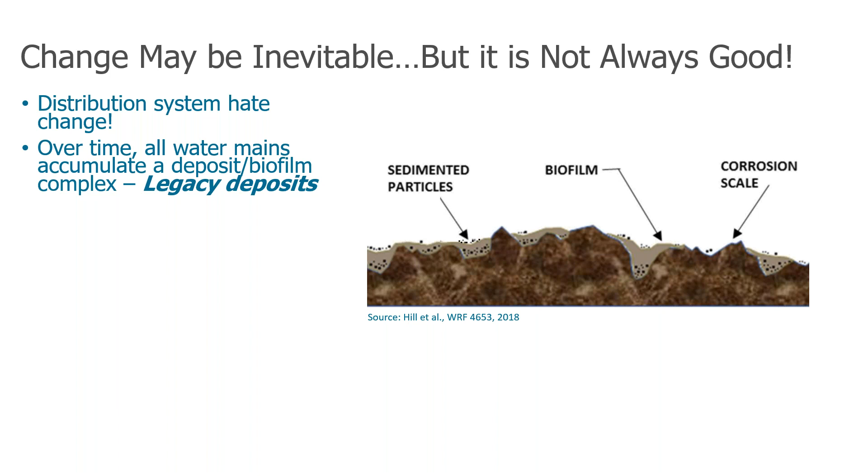So beginning with background and reasons for concern. We all know change is inevitable, but it is not always good. Distribution systems hate change, because over time, all water mains accumulate a deposit biofilm complex that we call legacy deposits. This is really a complex of corrosion scale, biofilm, and sedimented particles that all occur together in what we call a dynamic equilibrium with the water.

They can subtly adjust to minor changes in daily flows and maybe subtle changes in chemistry, but when we have larger scale changes, we can get destabilization and then release of these deposits. Now, these releases may or may not result in public health concerns, but they almost always can result in customer complaints.

So what we have to remember is that we have a lot of old pipes out there, and then when we do a change, we're going to have a reequilibration process. It's during this reequilibration process that we can really start getting into some trouble.

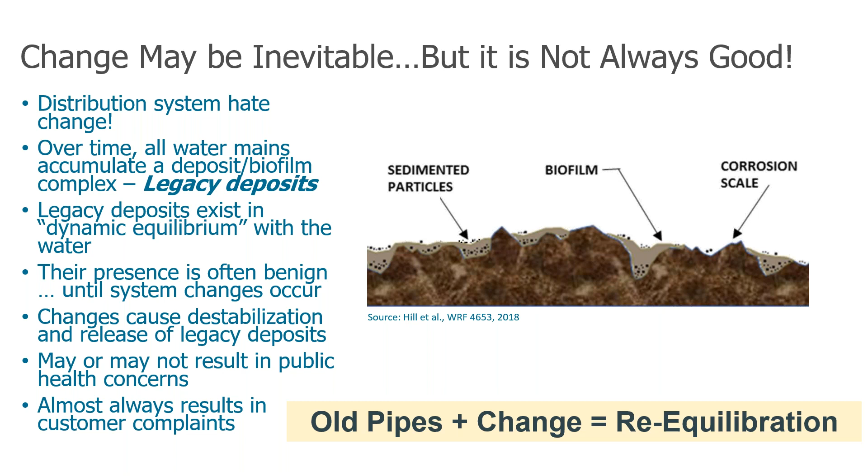Compared to non-scale forming pipes, where the material that is present has either been settled or co-precipitated or adsorbed, it's not from the pipe material itself. And those are often our cement-lined, plastic, and asbestos cement pipes.

The iron and manganese and biofilm that accumulate on these pipes serve as major accumulation substrates in and of themselves for other regulated metals. We commonly find these metals at varying concentrations in these pipe scales. And it's not just the big corrosion tubercles we worry about. Yes, there's a lot of iron and there's a lot of massive material, but these very thin films can be great accumulators for biofilm and these other regulated metals.

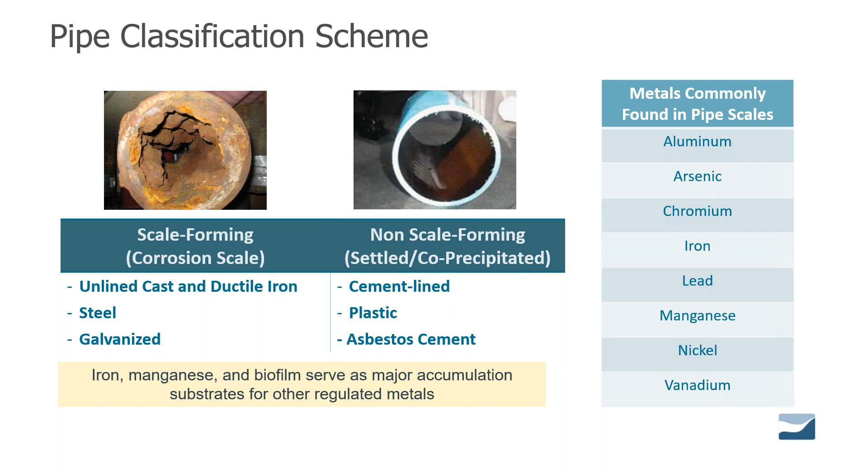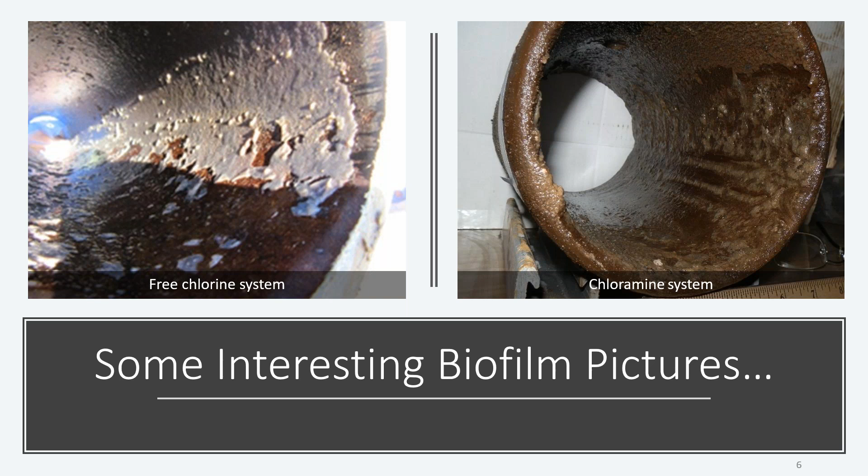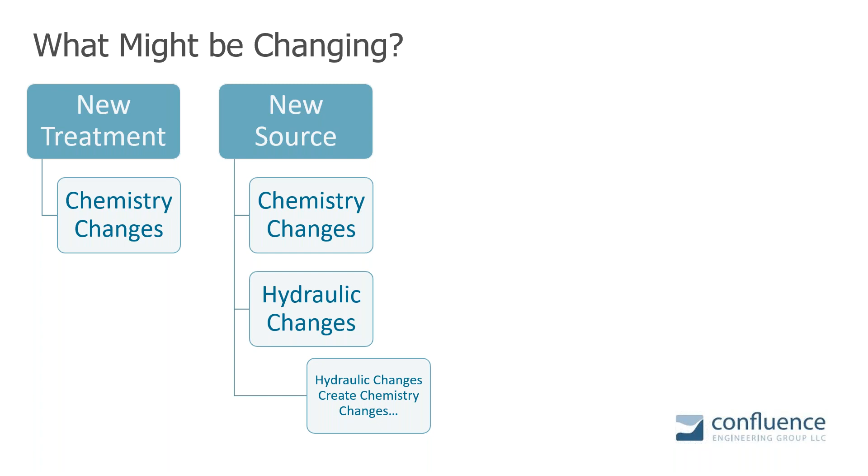So what might be changing with a source or treatment change? Well, with new treatment, assuming it's at the same plant and the hydraulics aren't changing, we're really looking at some chemistry changes. But with a new source integration, we have potential chemistry changes due to differences in the compatibility of the supplies, but also significant hydraulic changes that can have hydraulic scouring effects causing releases, but can also create chemistry changes because we're changing the flow dynamics in the distribution system.

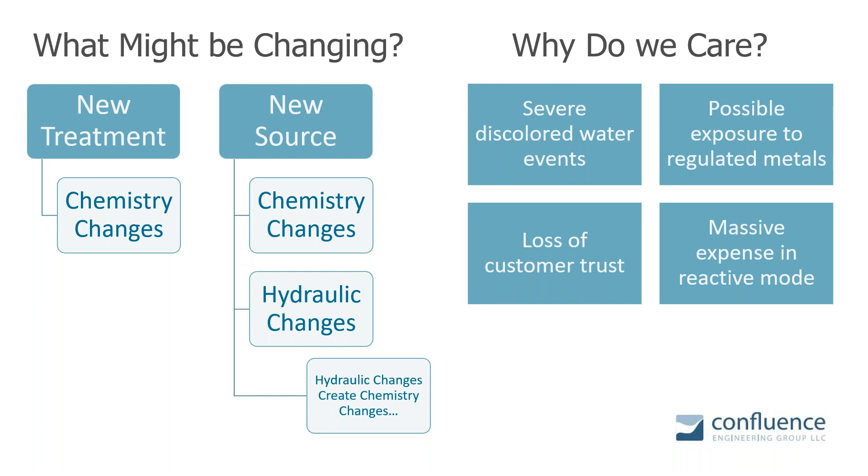And of course this is quite important because this can result in severe discolored water events, possible exposure to regulated metals, loss of customer trust, and then massive expense when we are in reactive mode trying to solve one of these destabilization problems.

And then with these hydraulic releases, these particle resuspensions often have color to them and are releasing associated iron and manganese biofilm. But when we have a chemical release event, the time scale can be much different. It can take days, weeks, months, or even years for scales to re-equilibrate. And the release may not always be in a visible form.

When we talk about even just measuring lead and copper at the tap, those are release events that you really can't see. So it's important to note that these can be happening, and we're not always having discolored water along with it.

So the time and spatial components can vary significantly for a hydraulic versus a chemical release. And therefore our monitoring approach to try to understand if these are occurring, and the need to control them, have to be suited to the type of release event that could be occurring.

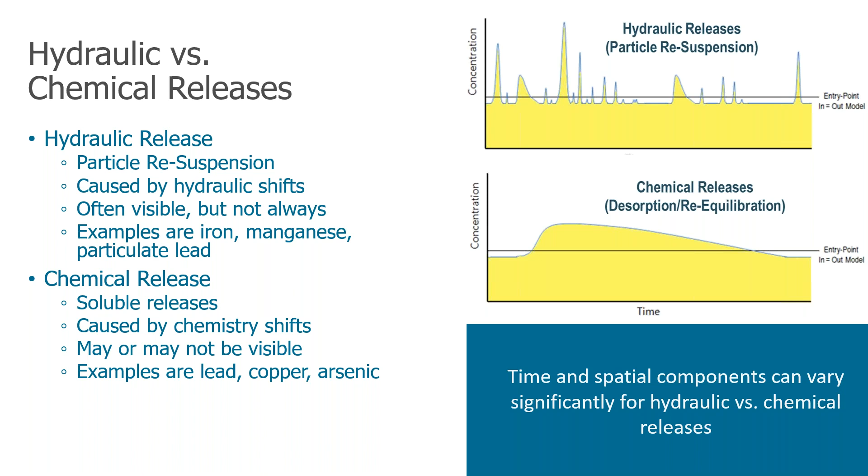Now we have a special combo release that we lovingly call the doom loop of distribution systems, when we get simultaneous chemical and hydraulic release. This is what we see when we're in reactive mode to these problems. We start with an unstable chemistry condition or a change in the chemistry.

We apply that to our tens or hundreds or thousands of miles of distribution system pipe and premise plumbing. That creates more unstable chemistry as all those pipe reactants react with the water chemistry. And then we run out, we start opening hydrants, we start moving water, flushing, breaking off tubercles, and we damage the scales while we're trying to clean up.

That exposes new fresh surfaces to have further reactions with the chemistry, and you can truly get into a doom loop. It's this exact process that we are trying to avoid.

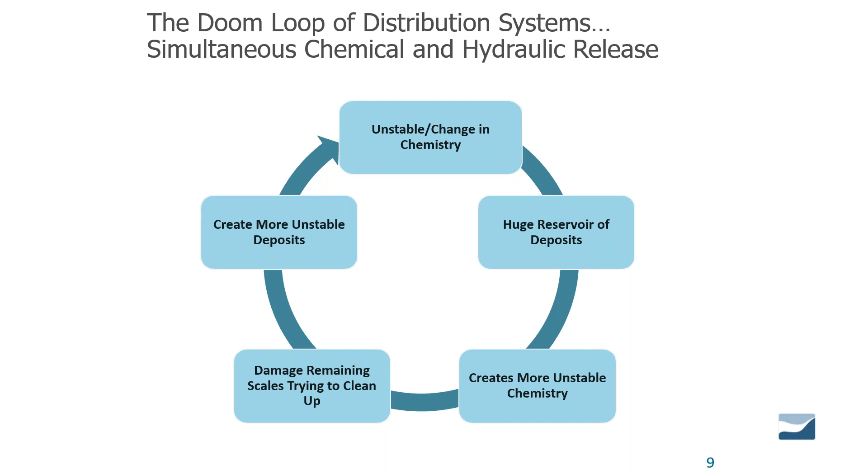So I want to talk about some corrosion control strategy changes that can impact water quality, starting with pH alkalinity adjustment. One key takeaway here is that you can't just match the pH of two different sources and call it good. The way the metals react to pH, DIC, oxidation reduction potential, and other parameters - they're actually forming different metal species in the water.

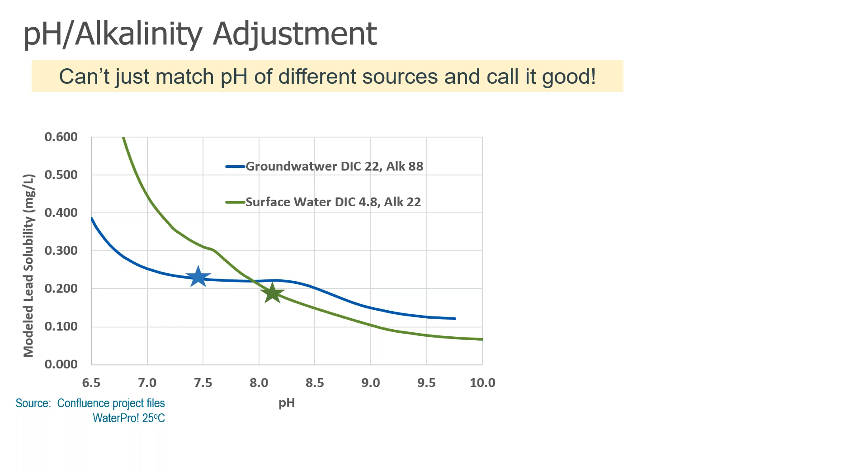So what I've provided here is an example: the green curve is a surface water, a low alkalinity, low DIC surface water, and this is its lead solubility curve. Lead solubility is a function of pH, versus a groundwater with a higher DIC. You can see the shapes of the curves are quite different - they behave differently at nearly all pH levels. And that's because of the different DIC, we're actually forming different lead species in the water.

The groundwater is forming a lead mineral, in this case dominated by one called cerussite, and the surface water is forming a different mineral called hydrocerussite, and these have different solubility characteristics. So even if we were to bring in a groundwater and a surface water and match the exact lead solubility level at the exact same pH, we'd still have two different lead species. And every time we alternated between those two sources, the scales have to re-equilibrate.

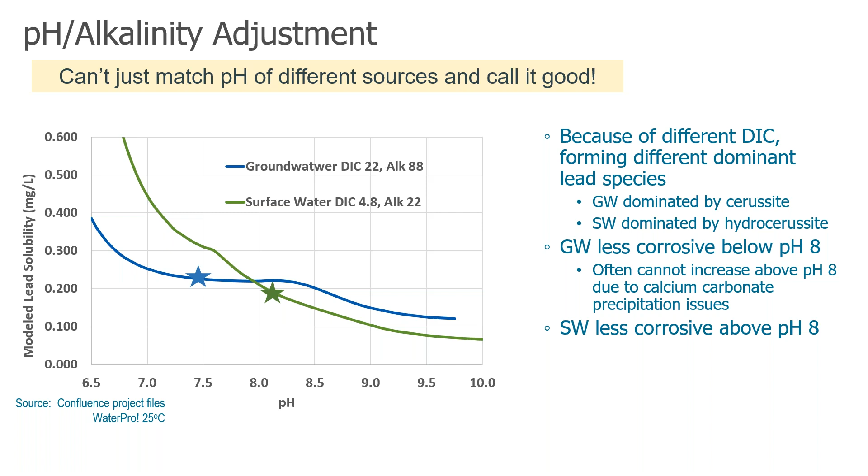City of Tacoma Water, with HDR Engineering and us in support, harvested materials from their distribution system - brass meters, you can see here, pipe, and lead solder, actually lead goosenecks - and operated the test rigs so that they were first all exposed to surface water at pH 8.1, and then a series of materials was harvested for visual analysis and scale analysis by University of Washington.

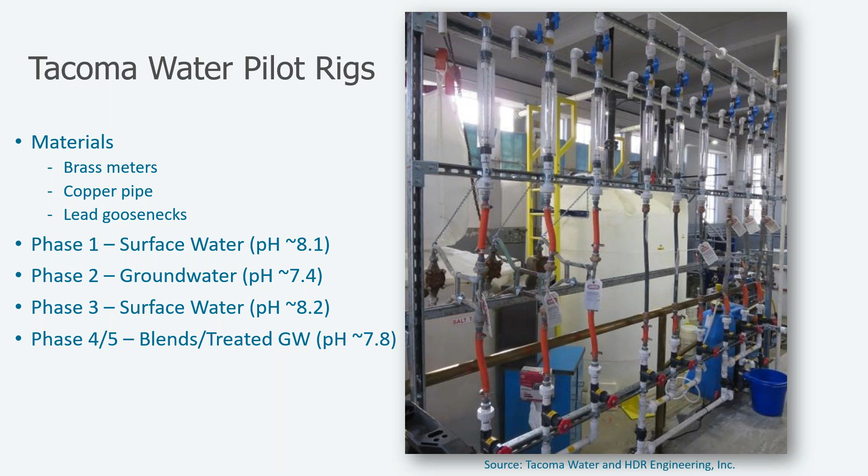And then the whole rig was converted over to groundwater at pH around 7.4, and another set of materials were harvested and analyzed to see the degree to which these changes were occurring. Of course, simultaneously, we were doing sampling off of the rigs to see what the lead levels were.

These graphs show in blue total lead, red is soluble or dissolved lead, so the difference between them is particulate lead. In phase one, when we're all surface water, we're hovering around 10 micrograms per liter of lead. Then when we switched to the groundwater, we see a particulate release, much more particulate activity, and higher overall lead levels.

Switch back to the surface water, a particulate release, and more particulate lead, because again, these scales are reequilibrating. And if we look at the overall solubility levels, lower in surface water, higher in groundwater, that is what the models predicted for the pH and DIC conditions of these waters.

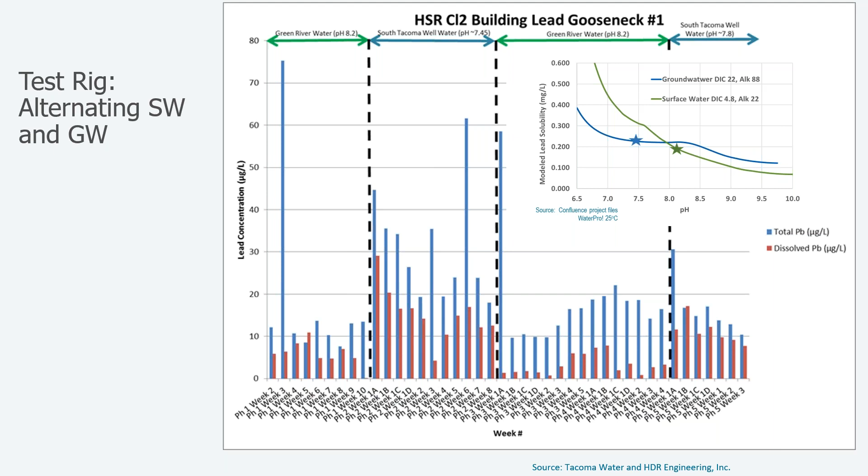So in this case, this was very well-behaved water. It did what the models predicted in terms of lead release levels, but it's this changeover that we kept seeing, the increase in particulate levels.

So you can't just match pH of a groundwater and surface water and assume that you are going to be forming the same lead species. So the goal here is to avoid alternating these sources or have a controlled blend as often as possible.

Some lessons learned with orthophosphate: once you start feeding orthophosphate, especially for lead control, you must always try to maintain an adequate residual level. Orthophosphate is forming very different lead compounds. It is not forming the carbonates, it's not forming the hydrocerussite and the cerussite. It's forming lead phosphates on the scales.

The effectiveness and the dosage required are a function of the pH of the water and the DIC of the water. Characteristics that can impact your ability to maintain your target residual include calcium, iron, aluminum, and other factors. Should you stop feeding suddenly or introduce a new supply with very different characteristics, you can imagine that you are impacting the performance of your orthophosphate.

And this is really one of the major issues that happened in Flint. It was discontinuation of the orthophosphate and the whole need to try to convert to the carbonate species, which wasn't successfully done, was a major contributor to the lead release issue. So we've been learning a lot about the importance of feeding orthophosphate and maintaining orthophosphate residuals in the distribution system.

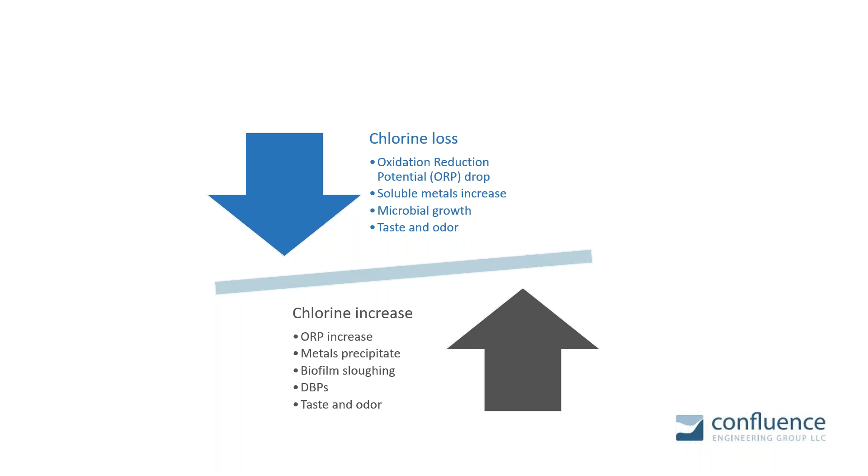Talk a little more about that. But with regard to maintaining residuals and trying to prevent metals release, this is especially important on unlined cast iron scales.

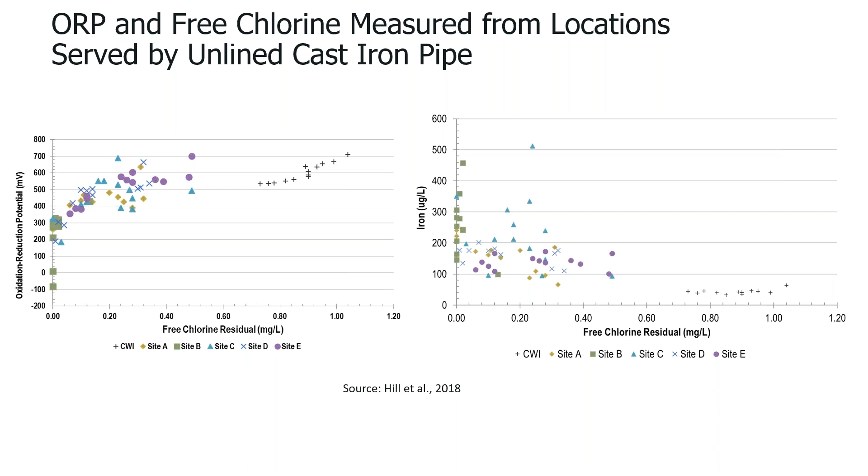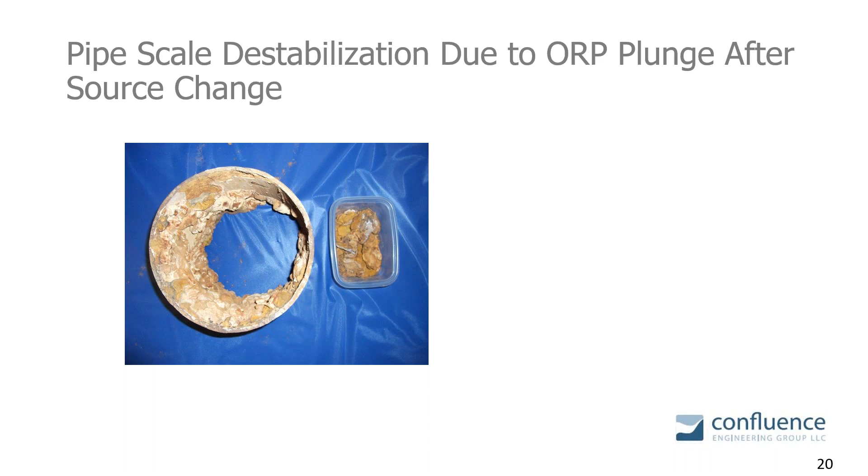After they introduced a new source of supply from the alternate side of the distribution system, this area became stagnant. The water mounded up in this area, became stagnant, and they lost their chlorine residual, and it literally dissolved the iron scale off the pipe.

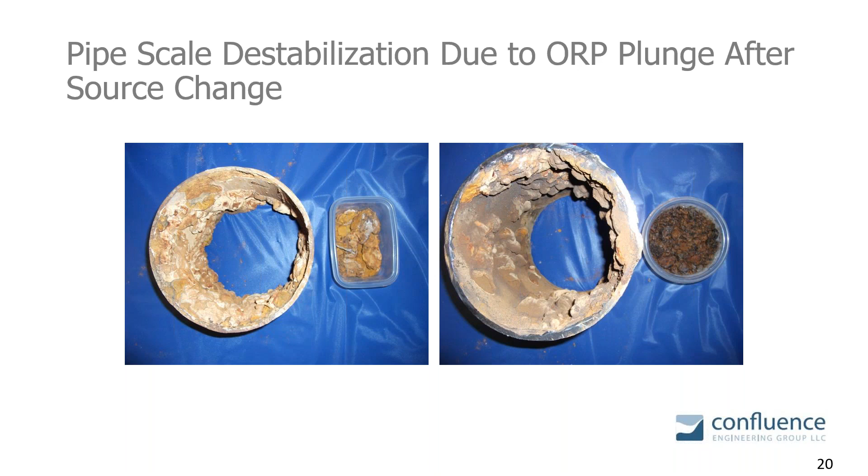It was determined this was all due to hydraulic mounding and complete loss of residual, with negative oxidation reduction potential. This was reversible once they got auto flushers, which kept the water moving and gently flushed the pipes without breaking up the tubercles even more. Eventually they did have to do some main replacement, as these were old, corroded mains needing service.

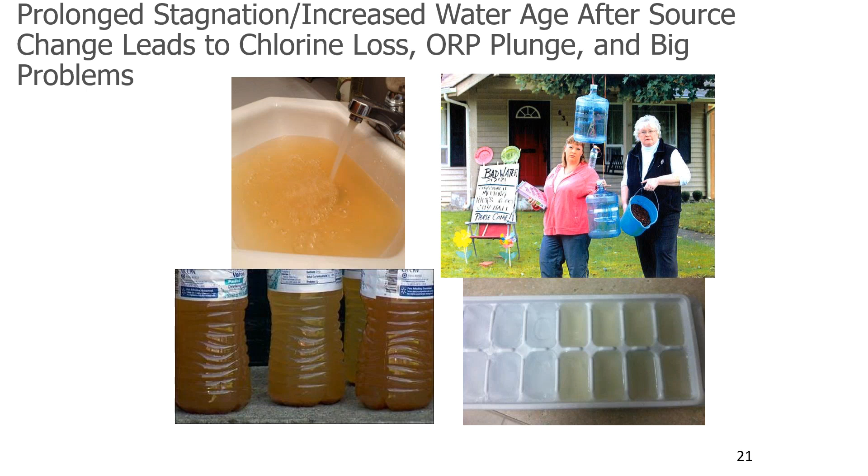An example of the other direction: increasing chlorine. We're going from unchlorinated wells to chlorinated wells, or areas that historically have consistently had low chlorine, and all of a sudden you make a change, adding booster disinfection to solve that, and you rapidly increase the chlorine. The types of problems we see are precipitation of particles such as iron and manganese, causing co-release of those regulated metals, and change in the biofilm.

There's also a quirk where copper behaves differently than lead. When you're in low chlorine, it forms less soluble copper species, and as you add chlorine, you create more soluble copper species. So during that reequilibration phase, you may see an increase in copper release.

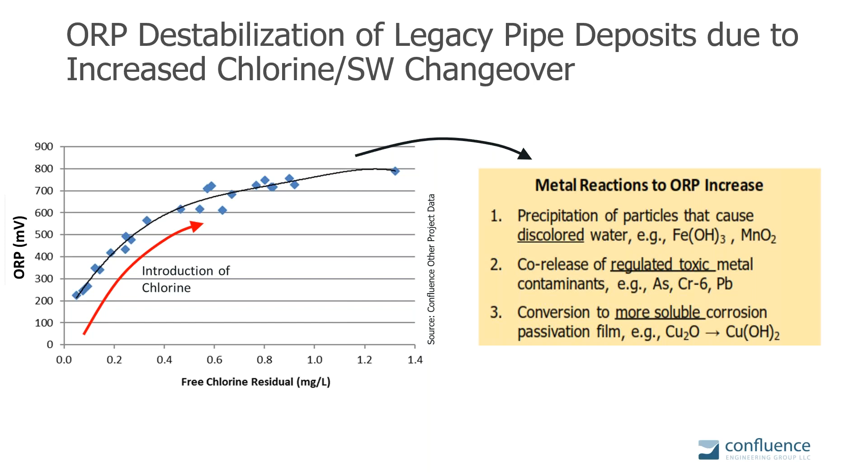An example of where we saw a problem with manganese: here's a system with fairly new pipe, only about 5 years old, but it had been receiving groundwater with non-detect levels of iron and manganese, but clearly enough in this case to be microbially adhered and adsorbed to the pipe in a very slippery slime surface.

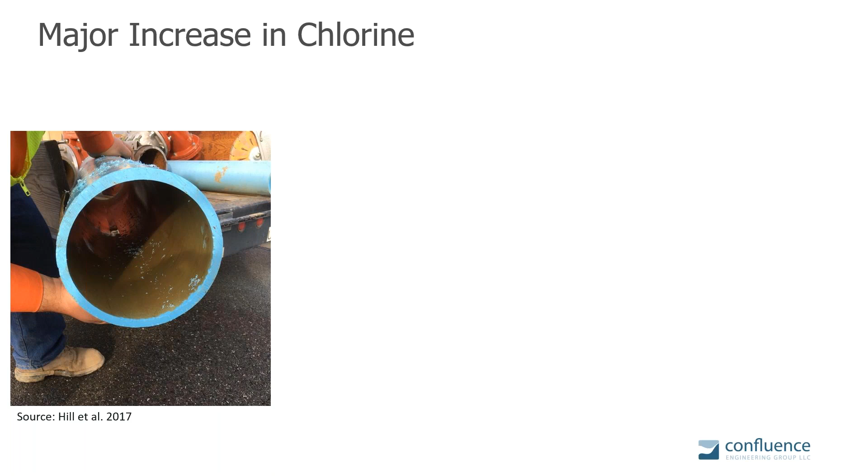Then when surface water was introduced with high chlorine, the chlorine went from less than 0.2, typical in this area, up to 0.8 all of a sudden, destabilizing this material. Flushing, even coming back after 2 weeks, after 5 months, this tea-colored material from ongoing destabilization of the pipe materials from the chlorine was occurring, and flushing was just not enough to get it out.

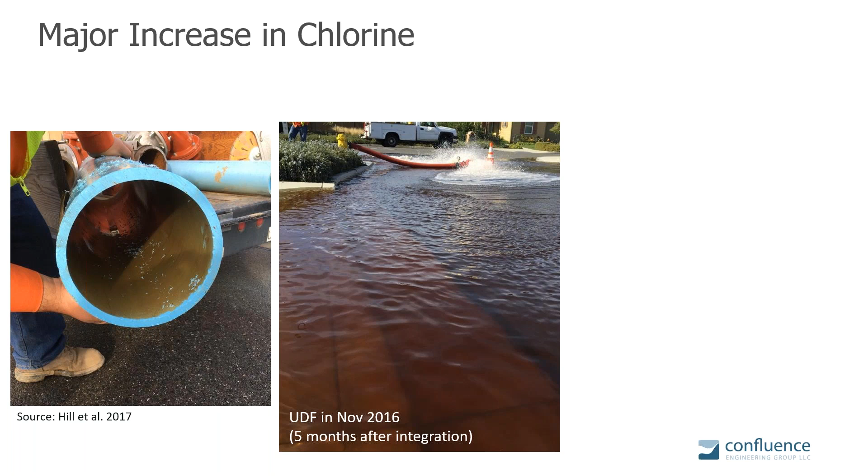Eventually I had to do swabbing 10 months later, and this is still the amount of material coming off of pipes that looked like this, with very thin films. So in this case, there was a widespread recurring discoloration episode lasting about 12 months. This is a chemical destabilization, attributed to destabilization of the legacy manganese and biofilm adhered to this pipe due to the introduction of a major increase in chlorine.

So with filtration changes, I just want to talk about a couple of things. Don't have a whole lot of time to cover these in detail, but we have to be aware that when we're changing coagulants in our filter plants, we can make changes in the chloride-sulfate mass ratio, which can impact galvanic corrosion.

And if we're increasing chloride levels, we also have to understand that that's not good for iron scales either. It can impact the solubility of iron, and then also aluminum breakthrough and accumulation.

I want to mention that if we don't have good control of our alum, it can accumulate in the distribution system. It can exert a phosphate demand. It can create milky aluminum phosphate water out in the distribution system. It affects pipe friction, all kinds of things. It can accumulate lead. So we definitely want to think about our control of aluminum before, during, and after any treatment changes.

Key objective of filtration is removal of natural organic matter. Just want to point out that impacts of NOM on metals are not straightforward, but overall it's good to remove. There's some research suggesting that NOM could be slightly protective for iron, and there have been mixed results for copper.

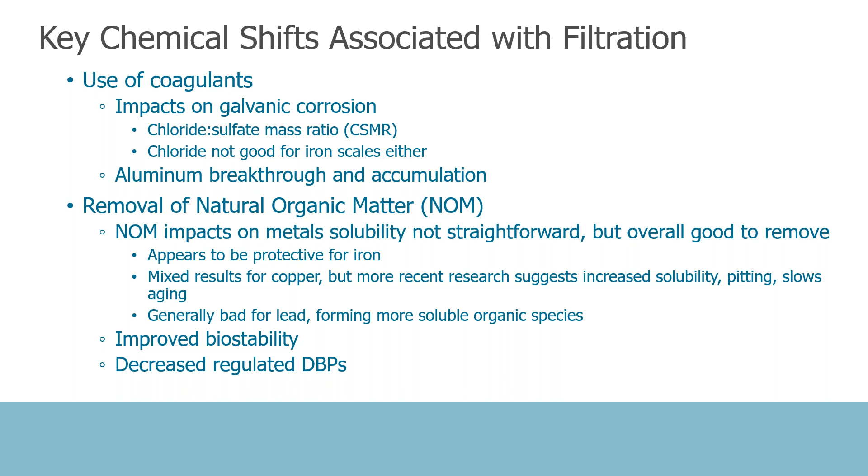But more recent research suggests that NOM itself increased solubility, pitting, and can slow the copper aging process, so it's good to remove it. NOM is generally bad for lead because it forms more soluble organic species, so again, good to remove it for metals. And we know, of course, we're removing the NOM for improved biostability and decreased disinfection byproducts.

So now to talk about some preparation steps and tools utilities can use to prepare for and avoid these types of issues. I've listed 6 key strategies, steps, and tools here. First, of course, we must do a detailed assessment of the finished water and compatibility of different sources. Understand the hydraulic changes that might be occurring if you're bringing on a new source or adding a chemical, such as booster disinfection from a new location. How is that going to affect areas of the distribution system?

Understanding what is out there on those piped materials and deposits. Reviewing your O&M strategies and capabilities. Do you have a flushing program? How do you control water age? Do you turn over reservoirs? What are your capabilities, and how much would it take to enhance those capabilities?

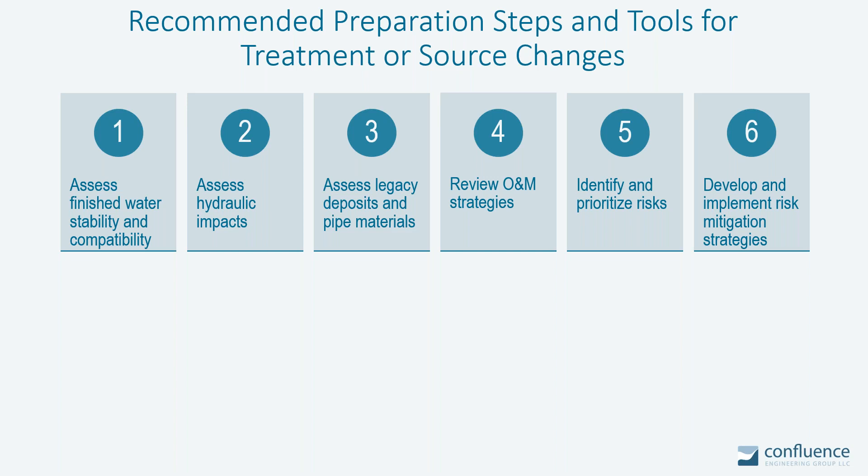And then you can identify and prioritize the risks and develop and implement a risk mitigation strategy well in advance of making these changes. I've listed a whole series of tools under every one of these that can be used, and of course there are varying levels of expense and complexity. But at a minimum, every system should do the monitoring and desktop evaluation, should do some flushing to see what comes out of the pipes to try to understand what's there, and should start developing flushing tools and programs and get going on monitoring and communication. So there are key elements that must occur no matter the system size.

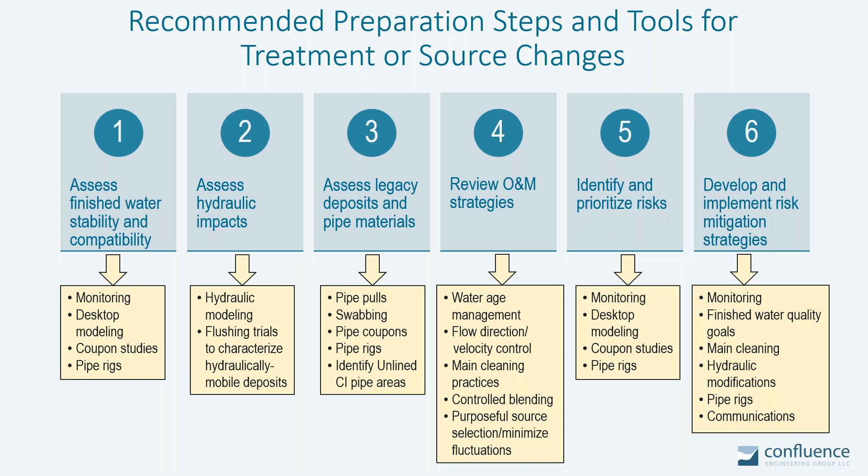With regard to main cleaning and flushing as a tool, we've been learning a lot - what comes out during flushing is really only a fraction of the story. It's what we call the hydraulically mobile fraction. And of course that makes sense: you're applying a shear, and there's a certain amount of material that's going to respond to that shear and be hydraulically mobile. Here's some photos of what came out during a flushing profile on a flush of C900 pipe at 6 feet per second.

And then on that exact same stretch of pipe, we did some swabbing, passing foam swabs where you have to have a launching station and retrieval stations. You've got a hydrant and you can launch the swabs through, and they act like a squeegee, literally. You can see the amount of material that still came out just after the first swab pass, after unidirectional flushing at 6 feet per second.

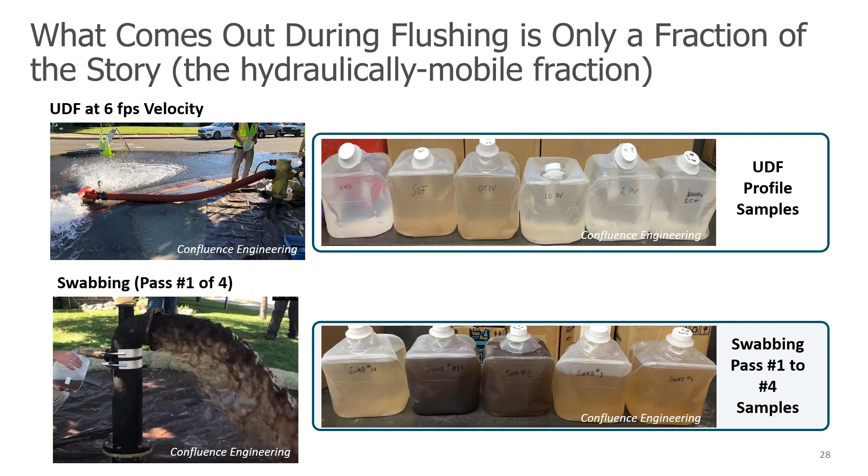Swabbing - the first pass of the swab provides substantial additional benefit to remove this material. I want to emphasize we don't necessarily recommend swabbing on a scale-forming pipe, remember that's with all the corrosion tubercles. This is on non-scale-forming pipe where you can safely squeegee the pipes without damaging the pipe or the corrosion scales.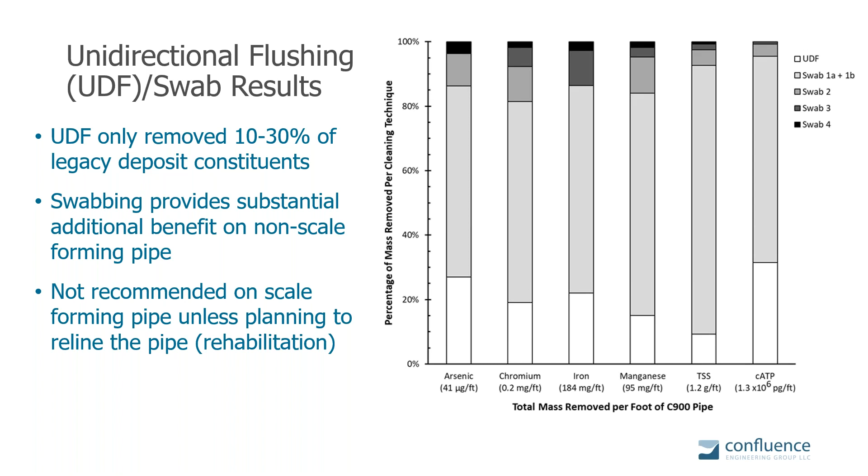If you're going to do swabbing or pigging on unlined cast iron pipe on a scale-forming pipe, you probably need to have a relining plan, a rehabilitation plan. So it's key to know - you might think you've gone out and cleaned your system ahead of a change because you flushed, but you've probably removed about 10% of the material. The rest is still there and able to react to the chemistry and hydraulic changes that are yet to come.

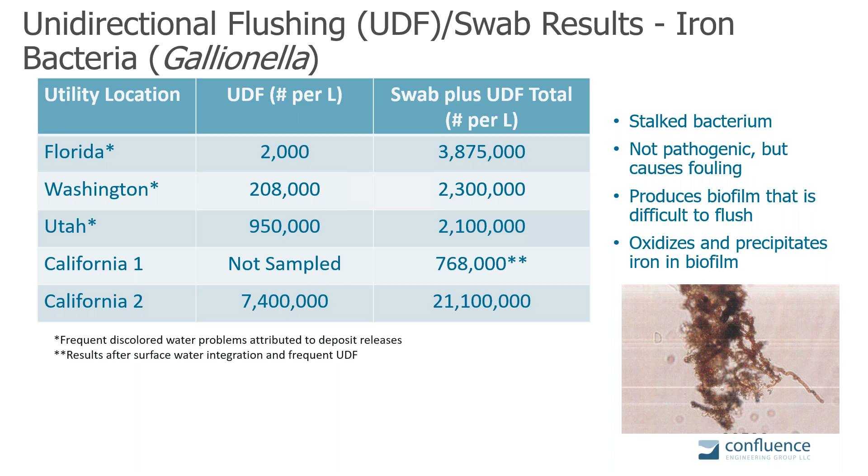Also, some interesting information on iron bacteria. We keep saying these are biofilms, biologically bound iron and manganese, and it is absolutely the case. Here are some results we see for iron bacteria at utilities around different states in the nation. The amount that comes out during unidirectional flushing versus swabbing is orders of magnitude greater. So if we want to get rid of the stuff, we might need more aggressive, long-term planning, more labor-intensive approaches than just UDF.

Need to emphasize the importance of hydraulic modeling, what a great tool it can be to assess water quality risks of new source introduction, to help understand where water age is going to change, where stagnation may become a problem, chlorine demand decay, DBP formation, understanding flow velocities, where you currently might be susceptible to accumulation, or where you might be what we can call self-cleaning because you have routine high velocities that push that hydraulically mobile stuff through, or where you're going to have flow reversals as a result of a new source introduction.

Where scouring and hydraulic release risks occur. And then, of course, for source tracing, to understand areas of influence where those new sources may be, what the blend fractions are, how can you better control those blend fractions, and where you're at most risk for compatibility chemical release issues.

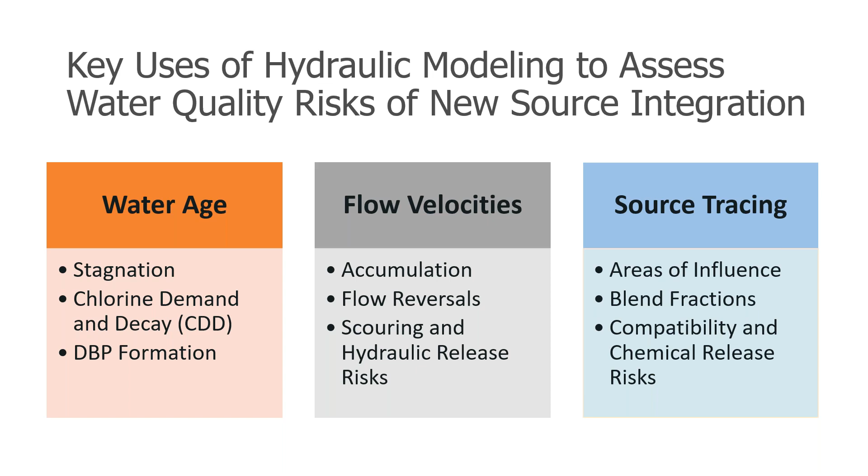In that plan with the 6 steps and all the tools listed, of course there's coupon, flow-through, fill-and-dump, materials rigs - all kinds of different types of setups that can be used to provide some information on relative impacts of source changes. We don't use these to predict actual outcomes because we've manipulated the system too much, whether it's harvested materials you've manipulated, fill and dump, or whether you're creating coupons. Neither exactly represents what's going to happen in the distribution system, but you can get a real feel for if you're going to have a major problem or a major change. So we recommend planning time to conduct some of these types of studies as well.

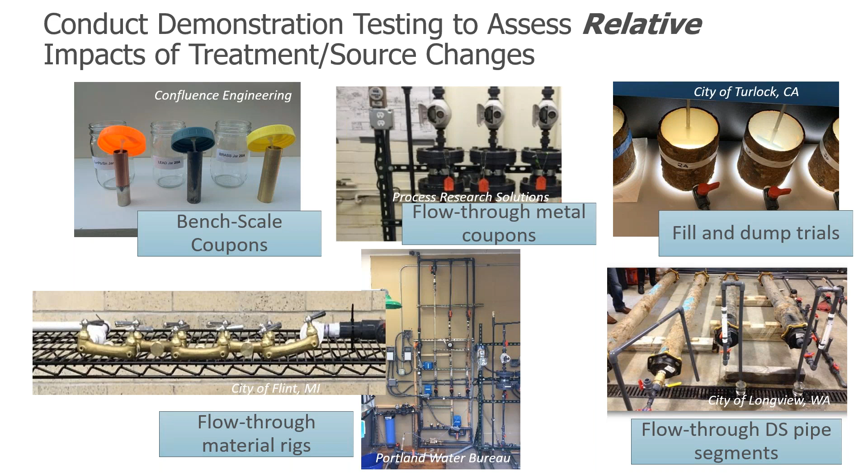Changes that are going to be implemented - low and slow is really often the way to go. Low and slow, and monitoring along the way. So if you're going to, for example, need to increase from pH 7.6 to 8.6, you might need to do this in multiple steps, allowing about 3 months, we would suggest, of an equilibration period before each change.

Doing water quality parameter investigative sampling all along the way until you've reached your target, and then maintaining that target for a minimum of 3 months, ideally 6 months, prior to doing lead and copper rule compliant sampling. We've observed that copper can react fairly quickly to distribution system changes for corrosion control treatment, but lead can really take months to form the protective scales that we're looking for.

So in conclusion and recommendation, I tried to summarize here the key chemical shifts that require attention, regardless if they're due to a treatment or a source change. I've listed them by the corrosion control, disinfection, filtration, and then just overall chemistry. I've listed parameters and the potential impact, so hopefully that can be a resource for those moving forward.

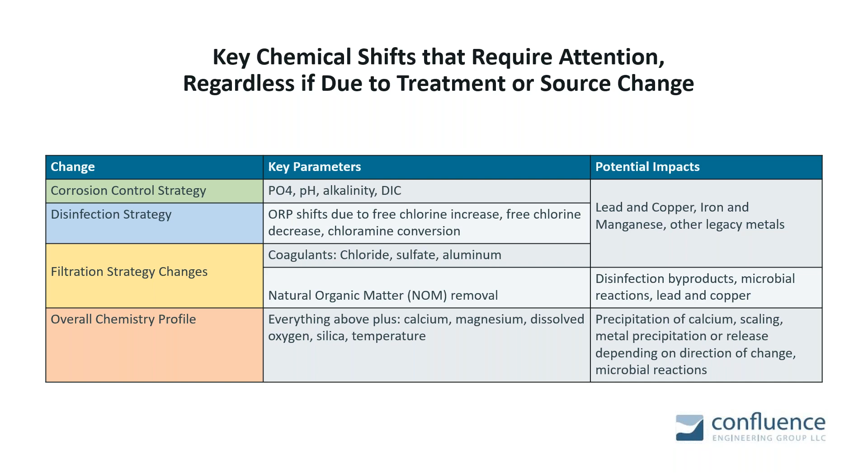I would like to emphasize the importance of how industry thinking really must evolve. We don't think about doing distribution system preparation studies often enough, but they really are equivalent to any sort of a treatment pilot plant study. We would not change even a coagulant up at the plant without doing pilot studies or jar tests or something. These distribution system preparation studies are equally as important.

This need to remove the legacy deposits, clean up our systems prior to making a change, or just because it's going to make everything more stable and water quality better overall - that is equivalent to removal of lead service lines. We are removing the inventory of the stuff that's creating the problems. So this should be a planned, proactive approach and taken with the same level of seriousness as we would when we think about removing lead service lines.

Remember, legacy deposits can also have regulated metals in them. We want to knock down that inventory, which really helps give us a lot more leverage on chemistry control.

And finally, having a distribution system operation and maintenance plan is equally important to a treatment plant O&M plan, which nearly every treatment plant has, but we don't have them for the distribution system. This includes how we prepare the distribution system, how we respond to events, manage water age, main cleaning, and avoid unnecessary alternating between sources. Working across departments is critically important.

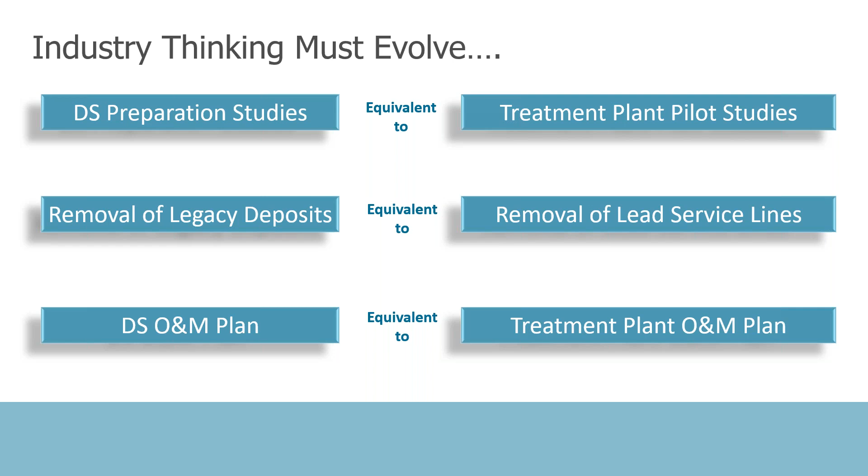So, last slide here, take-home messages. Treatment and source changes have caused many major water quality disasters, some captured by the media, but most not captured, though your customers have experienced them. We must spend the time, effort, and expense to properly prepare for these changes. Desktop, bench, pilot scale testing, hydraulic modeling, main cleaning - all of these tools are needed to understand and manage distribution system impacts.

I'm sure a lot of you are thinking, oh my gosh, this sounds so expensive and time consuming. Yes, it is, but it is less expensive and significantly more beneficial to do it in a planned, proactive manner with proper communications along the way, compared to reacting in emergency mode. Reacting in emergency mode means years of work, plus then you have to rebuild customer trust.

This requires effort across the utility departments. The tools we've listed need folks from water quality, engineering, operations, maintenance, and communications. Everyone needs to be involved. It's imperative to have mitigated as many of these risks as possible prior to making a change, and then to understand your remaining risks and have a plan for addressing the remainder.

And there are some changes that really just can't or shouldn't be made, and others that require serious study prior to implementing. We've given a few examples here. And finally, there's still so much to learn about the complex world of distribution systems. So we appreciate the utilities and everyone that's allowed us to study their systems and share the results with you all today. So thank you, that's the end of my presentation.

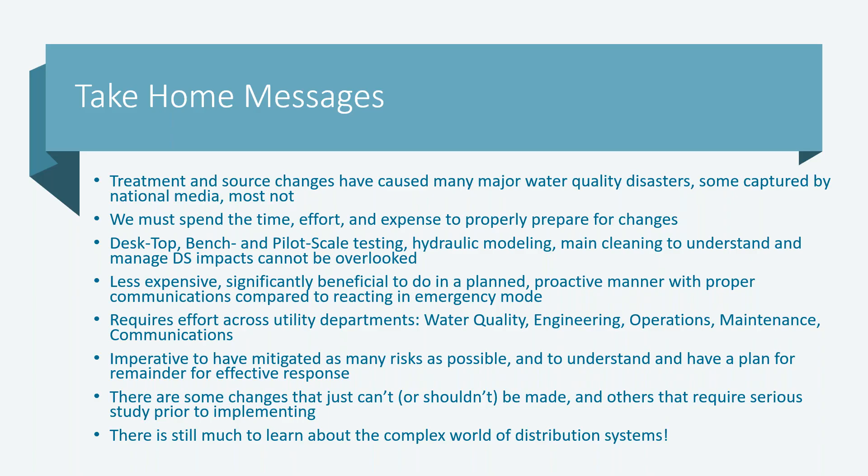Hand it back to Mike. All right, thank you, Melinda.

An important message that we need to keep getting out there about consequences of making changes. Our next speaker is Vicente Gomez-Alvarez. Vicente is a microbiologist with EPA's Office of Research and Development, Water Infrastructure Division in Cincinnati, Ohio. Vicente's research includes microbial ecology, including the application of genomic technology and the use of computational and bioinformatics workflow platforms for the characterization of microbial contaminants. Vicente.

Okay, can you hear me? Yes, we can hear you. Okay, great, I'm sharing my webcam right now.

First of all, I have to thank the organizers for the invitation to present my research study. And then, of course, I have to acknowledge my collaborator, Randy Revetta from the EPA, a part of this research study. A disclaimer: the views expressed in this presentation are those of the authors and do not necessarily represent the views or policy of the agency.

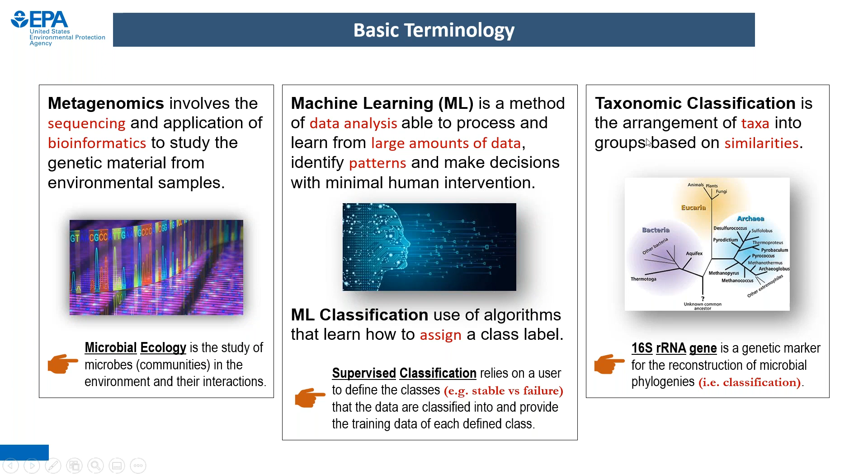I promise not to be too technical, but if you're interested in the deeper methodology of how we were able to design and apply this application, you can look into our manuscript, which has been accepted for publication this month in Frontiers in Microbiology.

Our motivation for pursuing this research effort: many drinking water utilities in the United States use chloramine as a disinfectant treatment in the drinking water distribution system. Many of them experience nitrification episodes, which detrimentally impact water quality. At the same time, it's costly and very time consuming for many water utilities.

This is the most important part of our approach - nitrification is a microbial process. That means the microbes are the ones who govern, or are responsible for, this process. Briefly, the ammonia in the system provides a substrate for a population called ammonia oxidizing bacteria, which produce nitrite, which can be oxidized by the second population called nitrite oxidizing bacteria, which oxidize it to nitrate.

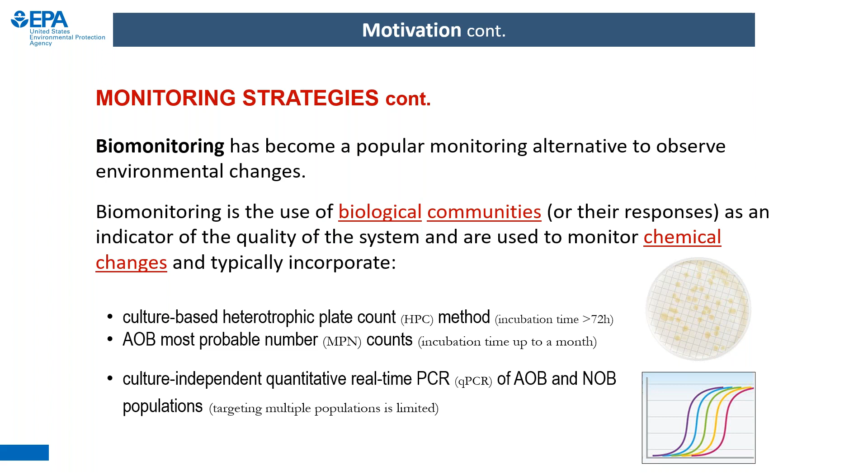New molecular technologies are able to detect some populations of groups that are correlated with or identified in nitrification. For example, you can do qPCR, which is the amplification of certain regions of the genome of certain populations. But the problem with this method is you cannot target multiple populations, so you're limited to certain groups, which will also give you only a limited response about the nitrification in your system.

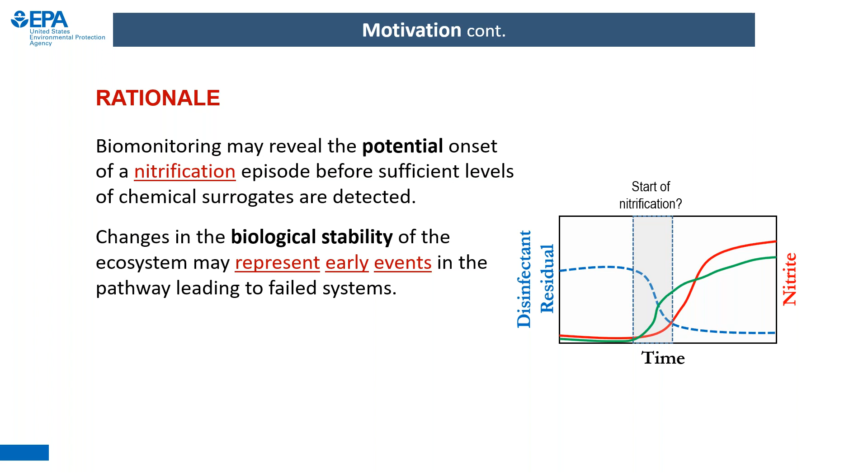So what is the rationale for using biomonitoring? Biomonitoring may reveal the potential onset of a nitrification episode before sufficient levels of chemical surrogates are detected.

That's how important it is - if you look at the graph on your right, this is a hypothetical scenario of a nitrification event in your system. If you have your disinfectant residual depleted, at one time nitrite is going to be elevated, which is a symptom of nitrification.

We don't know when that starts, but if you look into the green line, the communities responsible for nitrification are the ones who begin to respond to changes in the environment, activate, and then produce and process that ammonia, that free ammonia. That's why we like to identify these bioindicators to monitor our environment. Once we identify them, we can use them as potential predictors for nitrification, representing early events of a failed system.

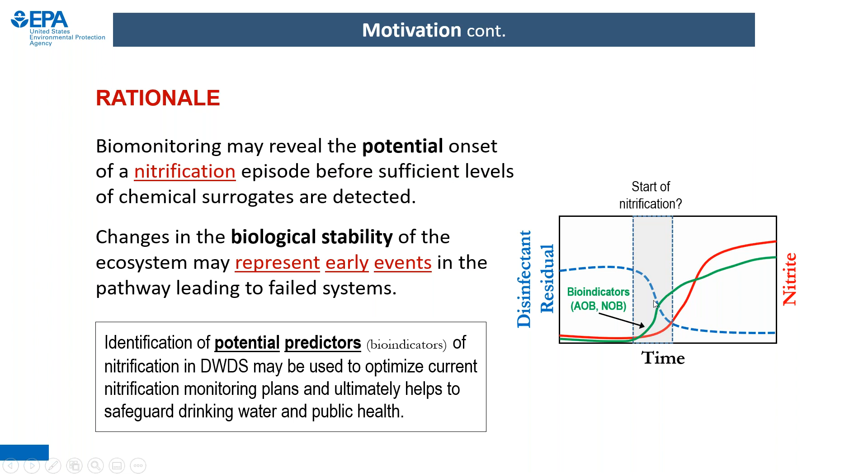At this moment, many utilities are only able to detect nitrification once it's already occurring. That means they can't stop it just by doing certain processes, like a chlorine burn or other steps, because by then it's already too late. So we need to stop this before it happens, and we're able to predict it by identifying these bioindicators.

So our approach is how we identify and use these bioindicators to predict nitrification. We want to explore what we call the water microbiome, which is the whole community of organisms in the environment. We do this in a chloraminated drinking water distribution system simulator. I'll talk more in a few slides about this simulator and how we manipulate it to obtain data.

So what we did is manipulate this environment between a stable and a failure system, and take samples from these different steps. You see this in the graph in the center. At each operational scheme, we take samples of the community, and using the 16S rRNA approach, we build what we call taxonomic profiles of these bioindicators. The graph on your right represents this approach.

So we take the microbial community, sequence it, and create this taxonomic profile from stable to failure. With that, we're able to identify those organisms responsible for, or that flourish during, these different operational schemes.

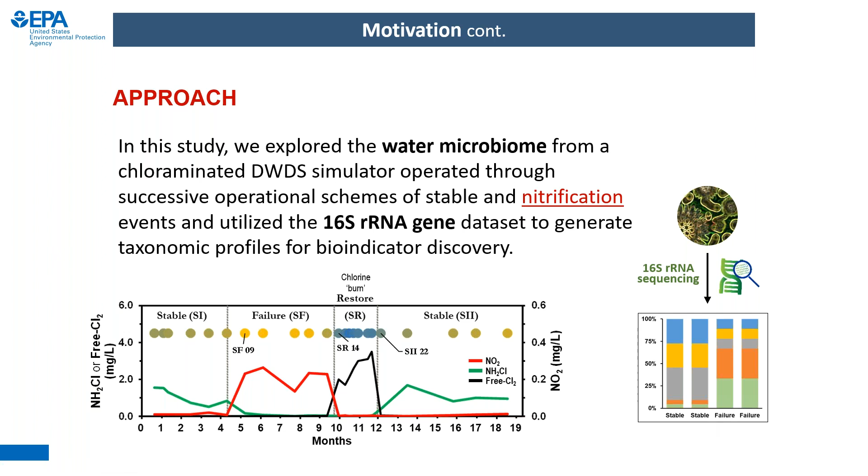So what is supervised classification, the method we're using? Supervised classification relies on the user to define the classes - again, stable versus failure - that the data are classified into. It's very simple: we take the data, separate it between failure and stable, and feed that to the algorithm.

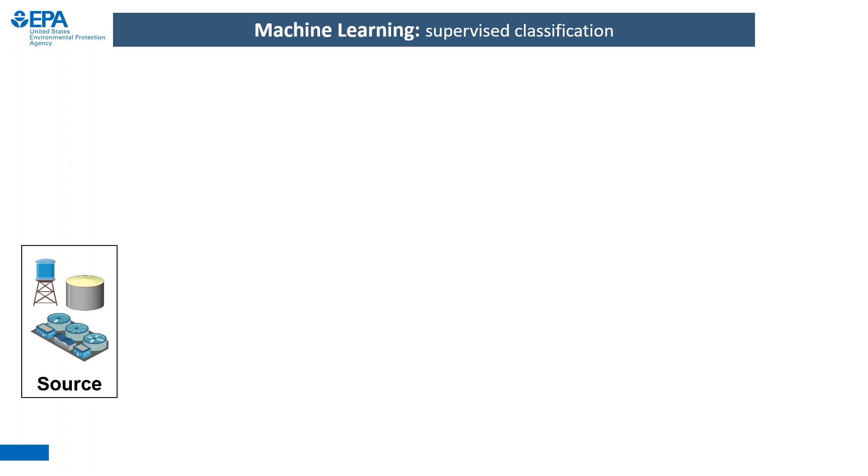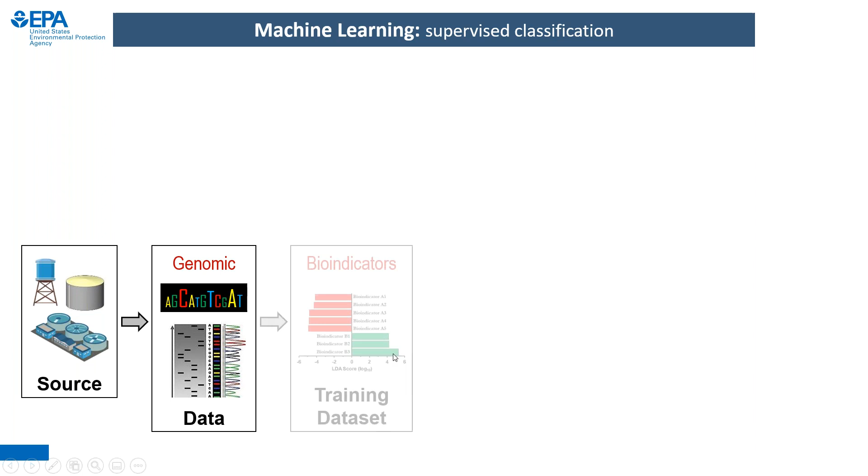This is an overview of the process of supervised classification. First, we have the source. The source will take water - bulk water, could be biofilm, any type of source water containing those communities or that affected environment. Next we take the data, and the data in this case is in the form of genomic data.

With that genomic data, we build our training data set based on bioindicators. We identify which organisms flourish or are depleted during the two different operational schemes of failure and stable. We feed that training set into our machine learning model, which is a supervised classification. We evaluate that training set using a receiver operating curve, which measures the area under the curve.

Once we have that, if we're satisfied with the training set or not, we can repeat it by feeding more data. If we're satisfied, then our model is ready to classify or predict our samples based on this classification model. We test it by feeding a testing data set, which is our unknown samples, evaluate that, and we're able to predict our samples between stable and failure. So it's a basic process, not too complicated.

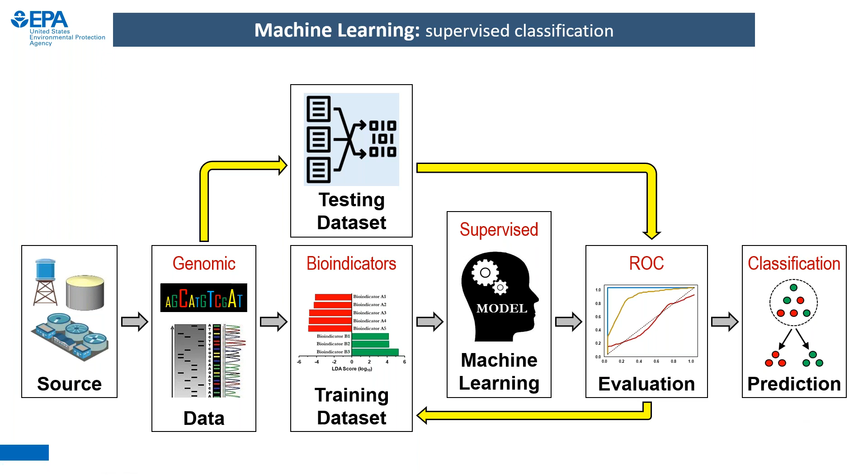So to evaluate our data set, we first generate a training data set. Our training data set was obtained from a drinking water distribution system simulator in operation at the US EPA Test and Evaluation Facility in Cincinnati, Ohio. We do this because this simulator can simulate a chloraminated water distribution system with start time control to simulate cycles of actual daily use.

At the same time, we can manipulate the system to simulate disturbances. So we can push the system toward nitrification, or vice versa, and collect samples - which would be very difficult to do in a real-time distribution system.

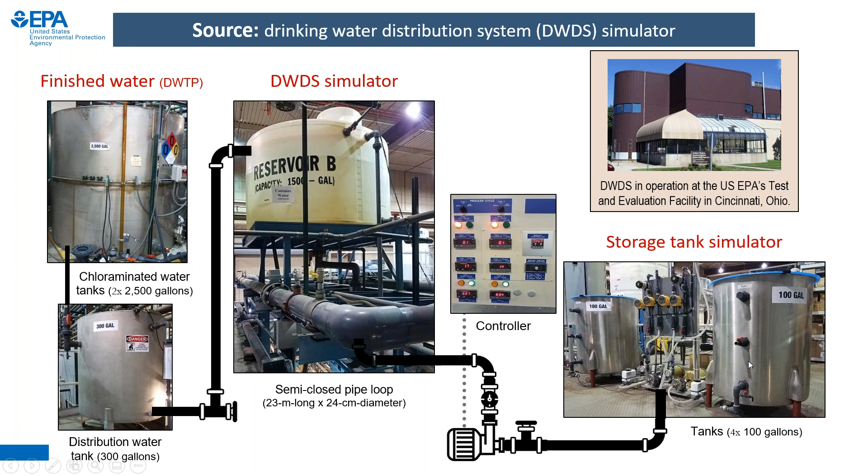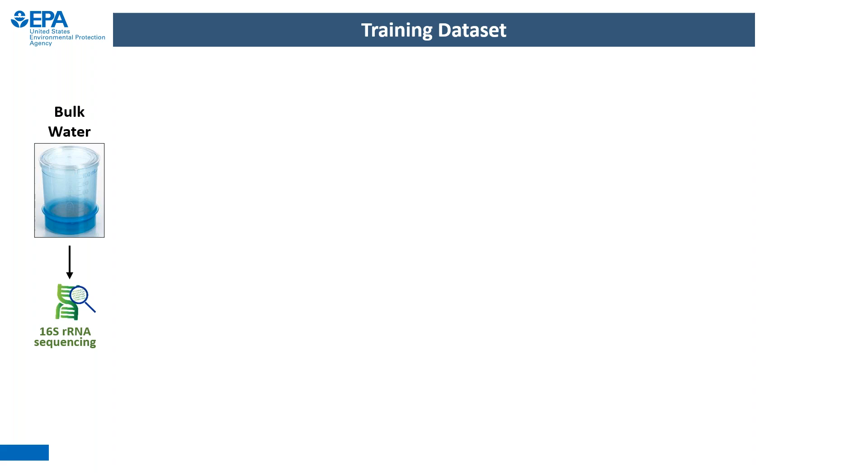So what we do, in every operational scheme at every different time, we collect some bulk water. We filter that water, which is the collection of the microorganisms. We extract the DNA.

Once we identify these organisms, these bioindicators, we construct a training data set. This training data set is basically divided into 2 groups, what we call binary, meaning positive and negative, or stable or failure in this case. And that's what we're going to fit our model with.

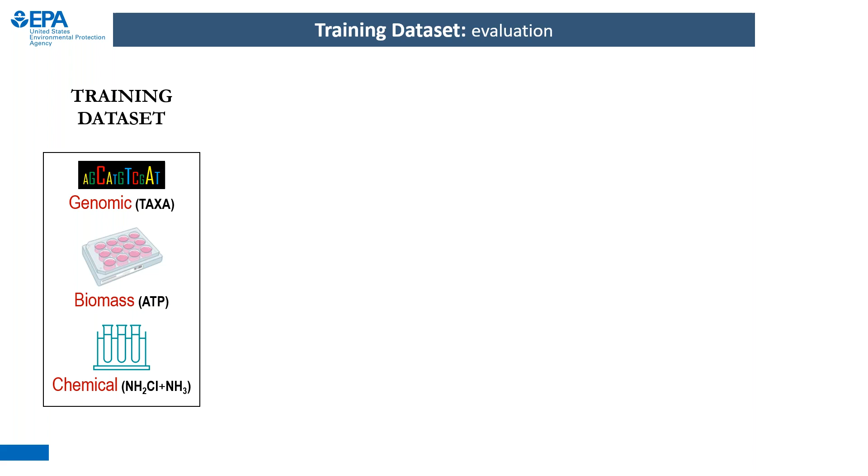And also we try to compare that with the chemical, which usually is chloramine and ammonia. This is usually what we do to measure levels of nitrification.

So we do that again, supervised classification. And if we look at the evaluation of the training set based on genomic, which is the taxa, based on biomass, which is ATP for example, and the chemical one - so the area under the curve, if we have a value of 1, it indicates an excellent classifier, so no false positive or false negative.

So you can see from our area under the curve, the taxa and the chemical have a kind of similar area under the curve, so they're very good to classify our samples, our training data set. Biomass, for example, is less than 0.5, which is equivalent to a random classification of the subject.

So using ATP to classify or predict nitrification is not a good alternative. So genomic and chemical, which chemical is right now the approach, so they are very good.

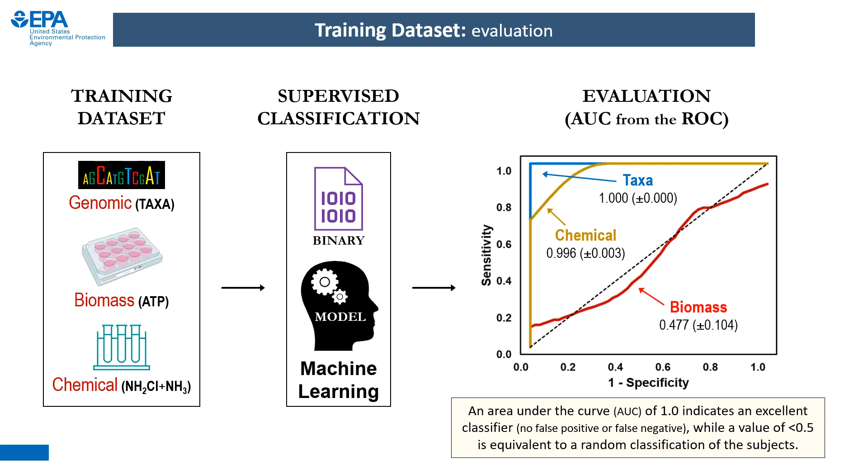So now we're going to try to test that with some data sets from different drinking water systems. And for that reason, we went to different publications, and we took the data from published papers and articles when they studied different chloramine systems, for example. So we have 2 types of data. Mostly the data that we were able to analyze or retrieve from the reference, the author never classified or determined the status of the environment.

So we divided that into categorized and uncategorized instances. We have 136 categorized instances, meaning the author tells us if their samples were collected during a stable or failure nitrification event, and we have more than 230 uncategorized ones. So we start with the categorized one, and using our taxa-based model, we're able to classify correctly 85% of our instances.

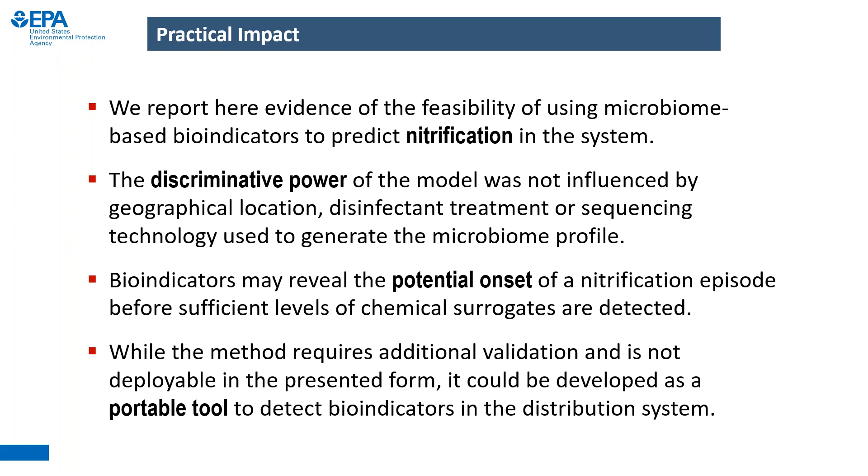So that's really all, and thank you very much for your attention.

Darren. All right, thank you, Mike. Let me get my screen going here. How's that look? Does it look good? Could you switch your display settings? Oh yeah, right. How's that? Looks great. Great, thank you.

Okay, so I'm going to talk about one of my favorite subjects, and that's particles. Today I'm going to focus on lead, but much of what I talk about will be applicable to other particles as well that we might find, in particular in our distribution systems.

Before I start, I certainly need to acknowledge that right now in our labs in Cincinnati, we have a really great team of people - engineers, scientists, materials scientists, and others that are working on distribution system issues. A lot of us are working in the area of particulates and lead. So I just wanted to acknowledge the team here.

And I'll get right into why do we want to understand and study particles, in particular lead particles. Of course, lead is an issue from a health perspective, and certainly we don't separate out when we think about lead in distribution systems - we don't think about particulate versus soluble, we're thinking about the total lead. And if lead is in the particulate form, we think of it as being dissolved in our stomachs, so we're concerned about total lead. Lead particles in general can result in large and unpredictable lead spikes, and that can be somewhat of a concern.

Looking for particles in water samples could tell us a little bit about the sources of lead in the distribution system, and potentially help us understand the mechanism or mechanisms of lead release. Treatment approaches certainly may differ from soluble lead to particulate lead, and I'm going to fall a little short on getting too much into that aspect. I'm hoping here to give you the basics of particulate lead, and not get too deep into the treatment approaches. But certainly approaches may differ, and the presence of particles may indicate the state of corrosion control, and potentially reflect the robustness of the lead scale, particularly if that's the source of the lead particles, and potentially also be a signal of some sort of underlying corrosion-related issue.

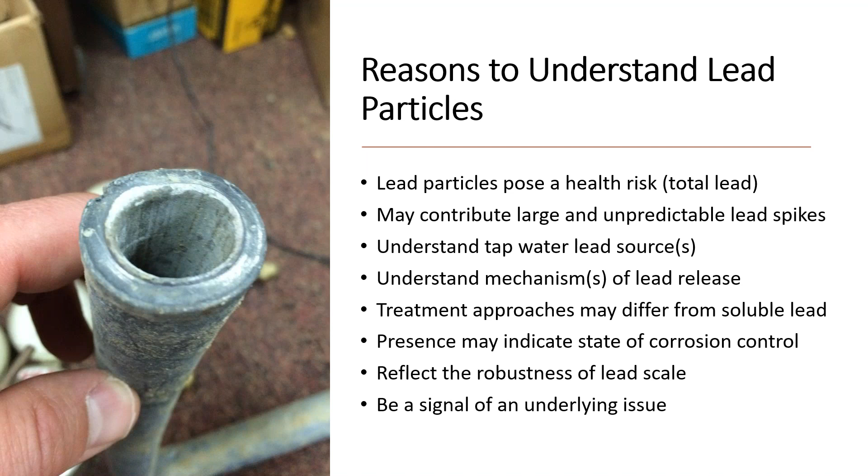I want to start out with some definitions, and I myself struggle with the definitions. We as a group struggle with definitions. We're kind of all over the place sometimes. We use different terms, so I'm trying to normalize that a little bit here and give you our sense of how we define things, at least these days.

I'm going to start out with lead 2 versus lead 4. That refers to the oxidation state of lead, and we can have lead 2 particles, and we can also have lead 4 particles, in the case of lead 4 oxide.

Soluble or dissolved, versus particulate or particle lead. When we talk about soluble, we have to cut it off somehow, and usually we look at soluble as referring to lead levels that pass a certain pre-identified filter size. Historically, that's 0.45 micron filters, but we'll indicate later that this is really not sufficient to separate particulate from soluble. Particulate lead is then defined as the difference between the total lead, the unfiltered lead in your sample, and the soluble fraction that goes through that filter you've defined as your cutoff for the operational definition of soluble lead.

We can have colloidal particles, and traditionally that's defined as particles ranging from 1 to 1000 nanometers or 1 micron in diameter. Nanoparticles are defined as particles in the range of 1 to 100 nanometers in diameter.

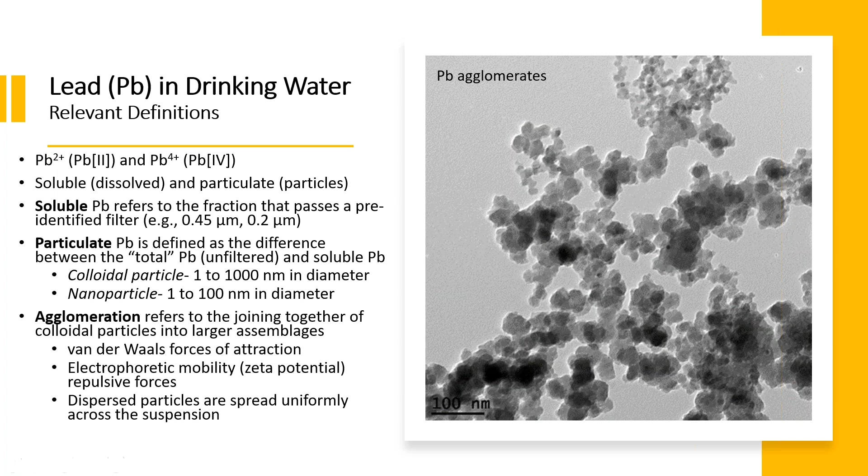Sources of lead can be the lead service line, coming from the scale in lead service lines. Particles could be coming from other lead sources, like brasses and leaded solders. With galvanized pipes, lead can sorb to iron corrosion byproducts, or be associated with a galvanized pipe in the first place, and come off as a particle with iron and lead associated with it. Or lead could be associated with sediment and other things downstream of the lead source, where it may have sorbed to surfaces or particles.

Lead can also precipitate into bulk water. So lead can come off a pipe scale as dissolved lead, but when it hits the bulk water, it precipitates as some form of lead that later gets carried on into the tap and out in the consumer's water sample.

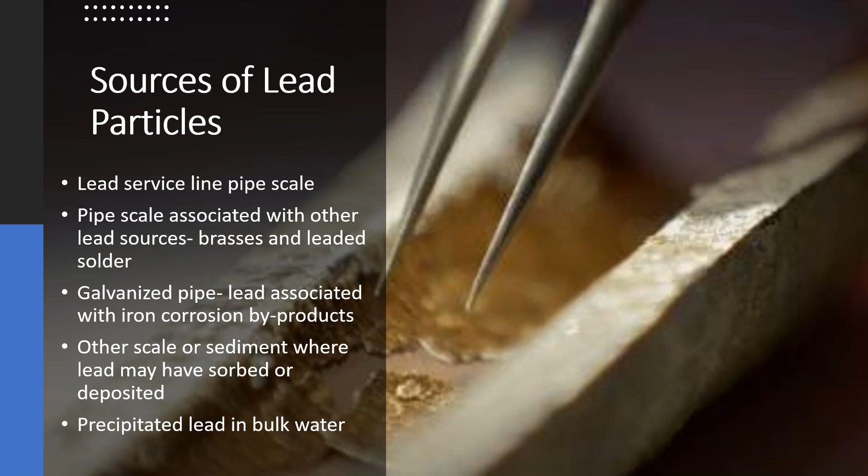So, again, some more definitions. Corrosion control, I think sometimes, at least technically, is defined to cover everything. But corrosion control refers to a means of minimizing metal release from distribution system materials. That is, total metal release.

My materials engineering friends would refer to corrosion as a process that involves electron transfer, whether it's corroding metal, galvanic corrosion, uniform corrosion, or localized corrosion. The point is that corrosion technically is one way that we release lead into the water, but there's a difference in terminology. The point of corrosion control, when it comes to drinking water, is we want to minimize these types, like galvanic corrosion, which can be a significant source of lead release. But really, our strategies focus on minimizing the solubility of minerals that are on the pipes themselves.

So what we try to do is adjust the water chemistry.

We try to adjust the water chemistry in such a way that we form minerals on the sources of the metal that are relatively insoluble compared to what would be there if those water changes weren't made. For example, the point of orthophosphate addition is because we're trying to form copper or lead phosphate minerals. pH adjustment, the same thing. We're trying to increase the pH, in the case of copper, to reduce the solubility of the minerals that would be forming on the surface of the pipe.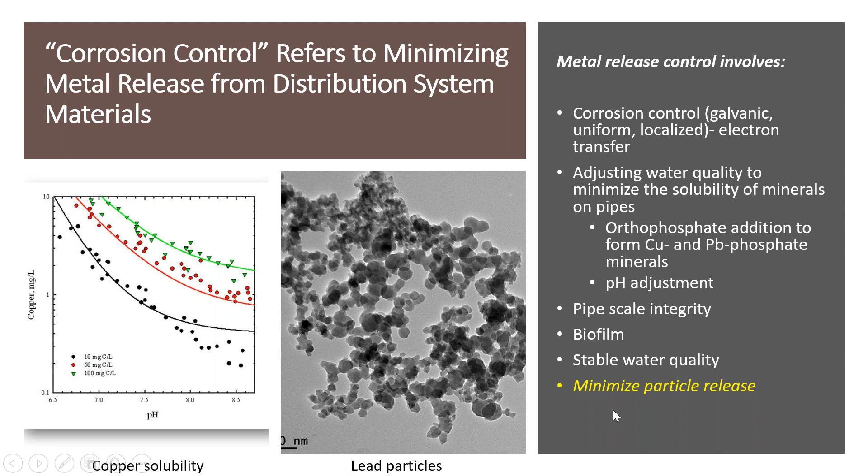So what do we look at when we talk about particle properties? A lot of things. Size is important, and the shape or morphology of the particles is important. What are these particles made of? What's the mineralogy? What's the charge? Are they agglomerations, clustering together, or are they individual unique particles suspended in the water? These are the kinds of questions we ask and want to know.

I refer you to the picture here—I want you to remember this picture because I'm going to bring it back up. This is an example of a suspension that contains a mix of lead phosphate, the small particles, and lead carbonate, the large particles. I'll refer back to this in a while, so just remember that for now.

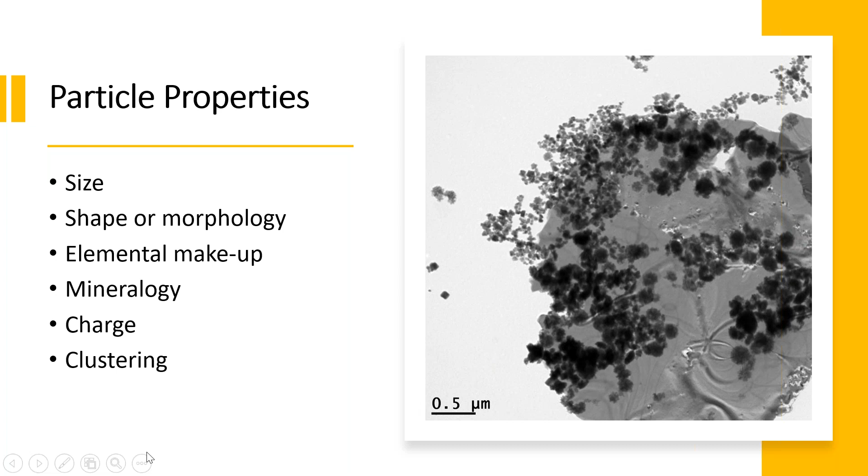When we do particle analysis and particle preparation, we want to do this in the field when and where possible—we prefer not to ship these samples. It's not like a water sample where you can get away with acidifying back in the lab. I don't feel comfortable with long-term shipping of particulate samples. So ideally we want to prepare these as close to where we're sampling and as soon as possible, because there could be artifacts as a result—mineralogical or aging transformations can take place, particles can agglomerate, and you can get sorption losses to the bottle walls, among other things.

This is an example of us doing some work in the field, setting up in the back of a truck after we took samples in an individual's home. These are some examples—I'm going to talk about TEM, transmission electron microscopy, in a minute, but here's a little grid. This is really small. This is the grid that we prepare in the field by just putting drops of our water onto it and allowing it to dry.

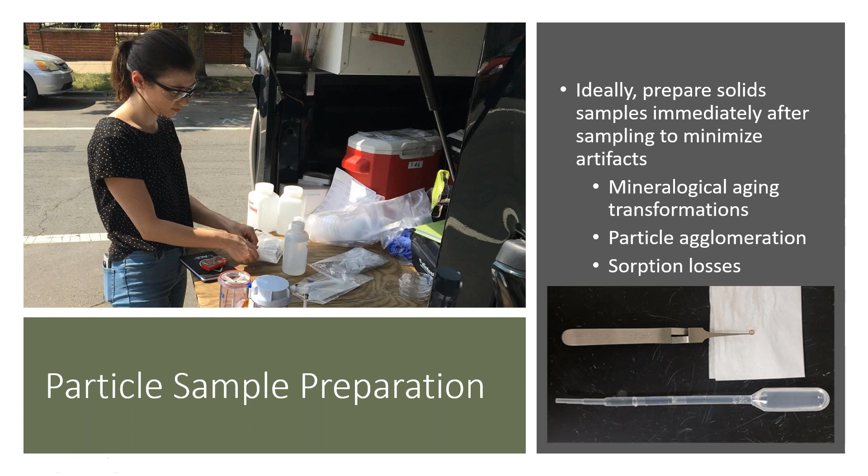So defining particles—the particle fraction, as I already talked about in our definitions, we define as the difference between the filtered lead and the total lead analysis. Traditionally, soluble lead has been defined as what goes through a 0.45 micron filter, but much smaller particles can be present. Historically, in our lab, we've used 0.1 or 0.2 micron filters, and now we're really using ultrafiltration filters a lot as well, because if we really want to understand what's going on, that's where we need to go with it.

And that's not just for lead—a lot of that work comes too from a lot of the work that's been done in manganese. I know folks have used ultrafilters for separating out manganese particles, which are known to be very small.

A couple points that, if you walk away with anything, these are some really good practical tips I'm going to share with you right now.

First of all, when you filter material, you've got to consider what type of filter membrane you're using, because we've done studies - there's a reference at the bottom here to a study we did a few years back - and filter materials will sorb lead for sure.

So when people show me data and they say, hey, we consistently get 30% particulate lead in our samples in this pilot study we're doing, it's always 30%, I scratch my head and ask what kind of filters are you using. That's not necessarily always the case - you certainly could have 30% consistently of particulate lead, that's not out of the question - but one of my first questions always goes to what kind of filter you're using, because that's the kind of thing you might observe as a consistent loss in your filtrations.

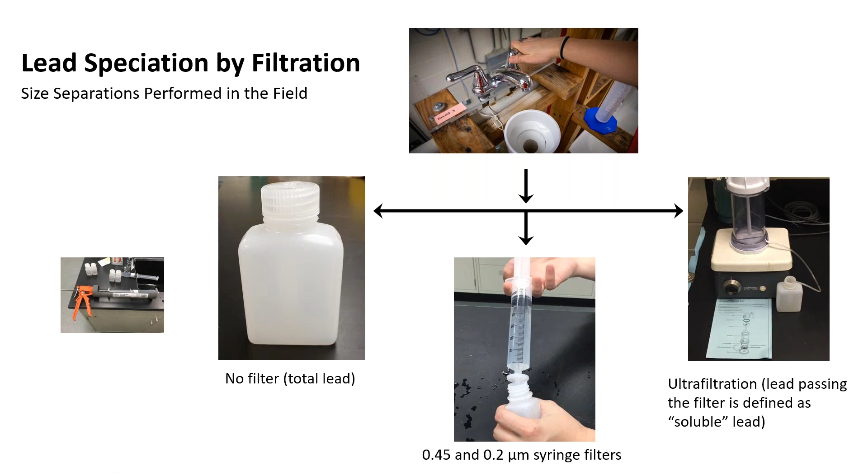I will say that these apparatuses - for those who've worked with ultrafilters, you connect this up to nitrogen, and the samples push through because of the pressures and what have you - we definitely have found that lead will sorb, and there's not a whole lot we can do about this. The material will sorb to the filter as well as the device. So we do a preloading procedure in advance. We presumably, and we studied this so we have data to support it, preload the surface sites with any lead that might be in a sample in advance. If anybody's interested in that, you can follow up with me on how we go about that specifically.

So let's take a look at some practical data and talk about a couple of things we've observed. This is the use of an ultrafilter and a 0.2 micron filter in the case of some precipitation experiments we're doing in the lab. This is the work of one of our master's students, Casey Formal, and what she's doing is precipitating lead - she starts with very high concentrations, 5, 6, 7 milligrams per liter range, and then precipitates in the presence of orthophosphate at different concentrations.

There's a couple of practical things I want to note here. This is at pH 8 at 50 milligram per liter dissolved inorganic carbon concentration, just for your information. Here is the total lead, and in blue is the 0.2 micron filtered lead - that's what's coming through a 0.2 micron filter - and then the ultrafiltered lead result. If you look at this from the first milligram per liter or so of orthophosphate, there's really no difference, the difference is really small, if any at all, between the 0.2 micron filter and the ultrafilter.

So you'd walk away from this saying, oh, my particles are all pretty big, they're coming out with the 0.2 micron filter so they must be bigger than that. But remember that picture of the two different particle sizes, the small lead phosphate particles and the big lead carbonate particles - that's what's happening here. If you look at the ultrafilter and see what's precipitated on the surface, you're going to find a mix of those two solids.

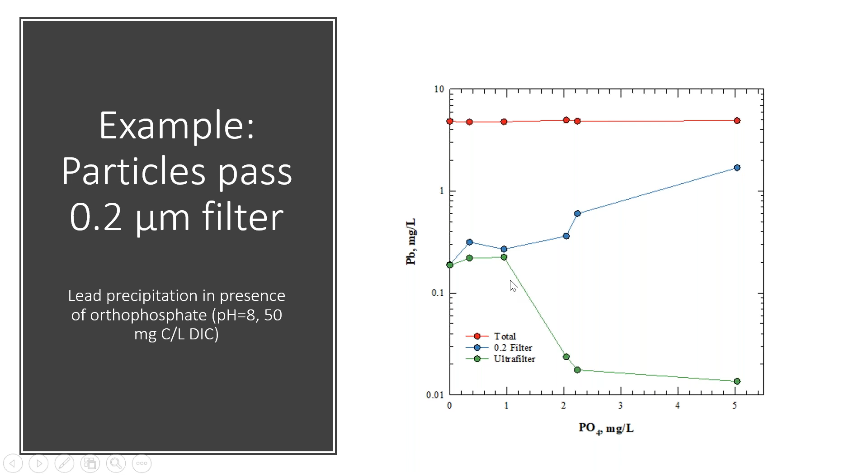This is a perfect example of how particle size matters, because what you formed - and I'll show you some pictures later of this - is small nanoparticles of lead phosphate. The point is the filtrations tell different stories depending on what you're looking at. The reality is these lead phosphate solids are very, very insoluble, but very, very small, and that can be important. Small particles mean a lot of surface area, a lot of interactions or activity with things, and a lot of potential mobility as well.

So expanding on that, size measurements - we have different ways to take size measurements of particles. For those familiar with zeta potential or electrophoretic mobility, there's an instrument that uses a dynamic light scattering approach to also size particles. I'm going to show you some results here from the same suspensions, but showing different results depending on what approach you use.

This instrument uses a laser shot through a particle suspension, and uses the distortion of the laser as the particles move through Brownian motion - that distortion is converted to a size. So this suspension, the result is 103 nanometers.

If I look at the scanning electron microscope, we can't quite make out the particles - it's difficult to see, there's a lot of them on the filter. But if you look close enough, and the measurement bar is here, trust me when I tell you that most of those particles are less than 100 nanometers, but that's about as good as you can get because you can't really see them very well.

X-ray diffraction actually tells you something about the crystalline size. If you look at the peaks and the width of the peaks, you can get information about the crystallite size, and X-ray diffraction told us that those particles were 16 nanometers in size. Our syringe filter, ultrafilter approach tells us that 97% of the particles are between 10 and 200 nanometers - that's about the best we can do there, we don't get specifics.

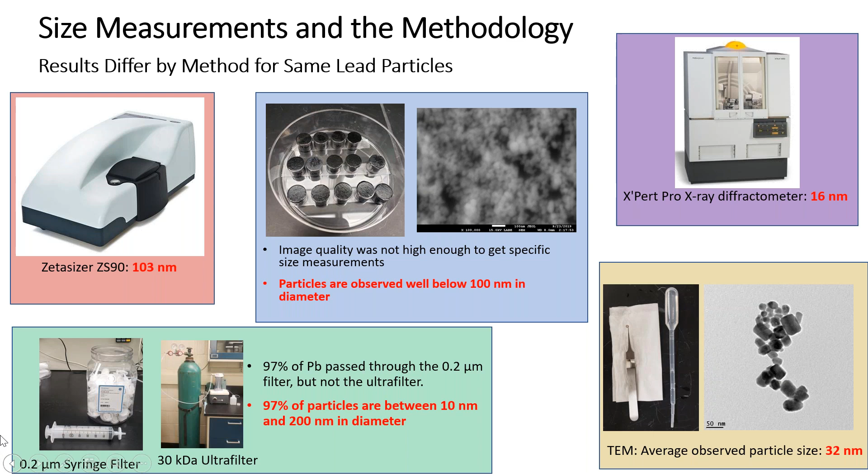So we go from 32 nanometers, which is actually very close to the X-ray diffraction result. We go from 32 nanometers, 103, 16. So which one are you going to trust? Well, provided your instruments are calibrated properly, and of course ours is, I like the TEM if you have availability of that, but that just gives you a sense for what kind of differences you might see.

And again, there are important solids analysis tools. I've sort of jumped ahead on this one, but we have some things in our lab, the ultrafilter for looking at particles as they go through different particle size filtrations, our electron microscope, which is good down to about a micron or so in size.

It also tells you something, when connected with energy dispersive spectroscopy, about the elemental composition of those particles you're looking at. Transmission electron microscope gives you really small particles, less than 1 micron, gives you information about shape and features, and can tell you something about the elemental composition. It also has electron diffraction, so it can actually tell you something about the crystalline nature if the particles are crystalline, helping you identify what they are.

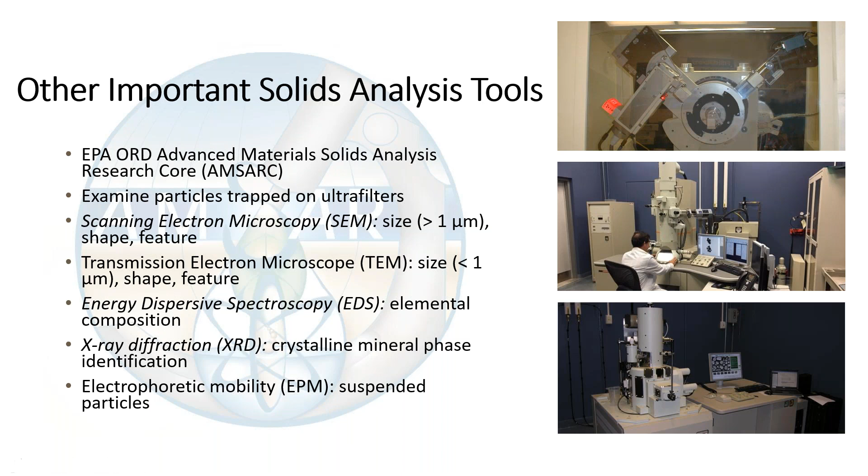EDS, again, could be connected to or part of the SEM and TEM, or used as a standalone approach. X-ray diffraction tells you something about the crystalline nature of the particles, and it can help you look at crystallite size. And of course, in suspension, if the particles are suspended, you can use your electrophoretic mobility approach or measurement to give you information about the charge and sizing of the particles as well.

Particles come in all kinds of shapes and sizes. I just wanted to show you some pretty cool images we've taken over the years. Lead pyrophosphate solids here look like roses or something like that. Anglesite is often found at lower pH conditions, maybe at the interface of a leaded solder joint. I showed you the lead carbonate, lead phosphate, how different in size they can be. And lead(IV) oxide particles are actually very small as well, so to give you a sense of different size particles.

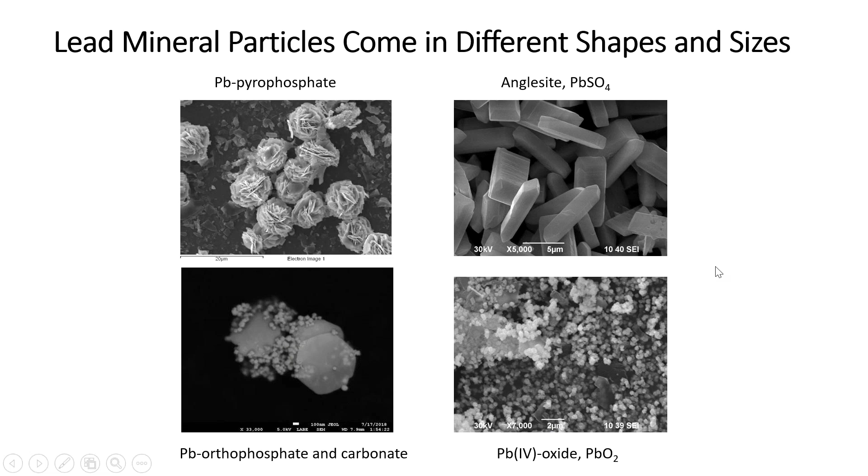So release mechanisms, it's important to understand what can result in these particle releases. Certainly water flow changes, flow direction and velocity changes, vibrations, water hammer - these things can cause disturbances to the pipe scale and result in a slug of particle release that might last for some time after.

Whereas there are also chemical or biologically induced release mechanisms, and this might be just direct water quality changes that dissolve scale components. And again, it's not just lead components - it could be any scales, it could be other things too. So for example, there could be aluminum, or there could be calcium that's incorporated into existing scales of, let's say, lead carbonates, lead phosphates, whatever it may be.

But if you disturb those, you might disturb the lead that's around them, and the result - think of it as kind of the glue holding things together - if you start to dissolve these things, you could have resulting releases of particles. It could be biologically associated releases as well, and maybe microbiology is related to local water quality changes in the scale that could result in some sloughing off, and the biofilm itself gets sloughed off, and particles could be incorporated into that.

Changes in scale-incorporated particle properties as well - so making a change in water chemistry could affect the nature of the particles that are already in the scale and cause them to come off in some way, maybe through charge repulsion, for example. Local corrosion-related water quality changes, biofilm sloughing I mentioned, and long stagnation can result in changes in local water chemistry. And I'm sure there are others that I've forgotten here.

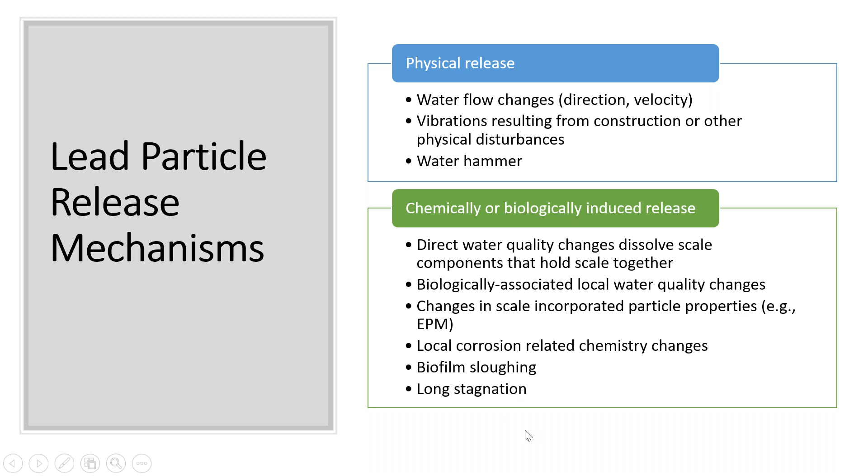Now I wanted to go over a couple of examples of what you can learn and gain from examining particles that have been suspended in these particular cases. These are just some real examples of investigations that we've been involved with, and I would highly emphasize here too, like everything else, it's not just about the particles. The particle piece is just one investigative tool to help you understand, when you have a problem, whether you have a problem, that kind of thing, in trying to understand things.

Tying the particles back to scale analysis is really, really important. And also the water quality and water chemistry changes are important as well. It's really tying all these pieces together to help tell the story as to what's going on.

This is just an example focusing in on the particles themselves. These were some samples we collected from a community where particles were removed from water that's had a long-term problem with lead release. So these particles were removed, and what we see here is under the scanning electron microscope, a mix of stuff, and the shading reflects the weight of the solids.

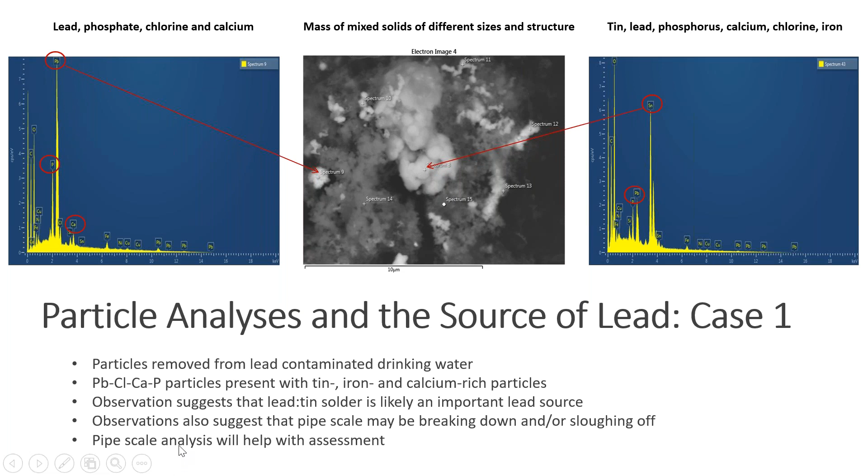So looking at these things, and tying us back to the scale, helps us understand where this stuff is coming from. Again, it suggests there's some sloughing off going on, and the pipe scale analysis, as I've emphasized, is important to tie to it. Whereas this is case study 2.

When you look at this one, in all the samples we looked at at this particular location, these are relatively uniform, really small particles, and there's nothing else really there. Again, this is a contaminated water situation. This sample was very high in total lead, but soluble lead was very low.

Again we find the same kind of situation: we find lead, chloride, calcium, and phosphorus associated with these particles. So it's maybe the same calcium substituted chloropyromorphite type of particle, but nothing else.

So what does this suggest? This might suggest something quite a bit different—that the lead is forming these particles more so in the bulk water or at or near the very surface of the pipe. It's not necessarily an issue of pipe scale falling apart or sloughing off, but rather particles being formed in situ somewhere that are just being taken up and picked up and moved along the water to the sample at the tap.

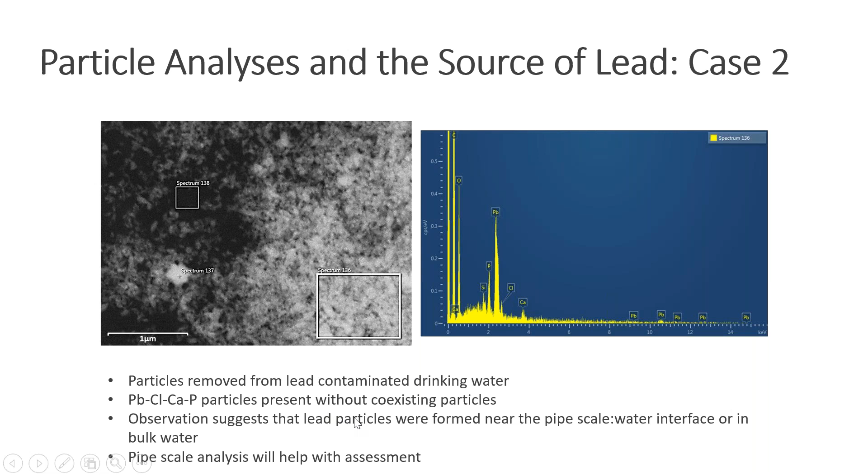So again, pipe scale analysis will certainly be helpful in understanding this, but you can see the differences that we observe in these practical samples.

So I'm going to wrap it up there with some conclusions. Particles can be important, and I believe they really are, more so because I don't know that we necessarily always look for particles—we don't get small enough sometimes. So they're certainly an important form of lead in drinking water, and the presence of particles indicates an ineffective corrosion control program overall. We don't want particles forming, and we want to understand why they do and prevent that.

Sample preparation is important, and there are several tools I've illustrated that can be used to analyze particles and characterize them. Particle size determination varies with method, so when we talk about particle size, we have to remember that the method sort of dictates the size too.

And then lastly, examination of particles can help identify the source of lead issues and inform us on a solution. I didn't really touch on the solutions because it is challenging. My thinking is avoid the problem in the first place. Do your homework up front, because oftentimes we find ourselves dealing with particle release problems after the fact, and we didn't perhaps do the studies up front to identify that a lead release particulate problem could be an issue. So I always say, let's avoid the problems in the first place.

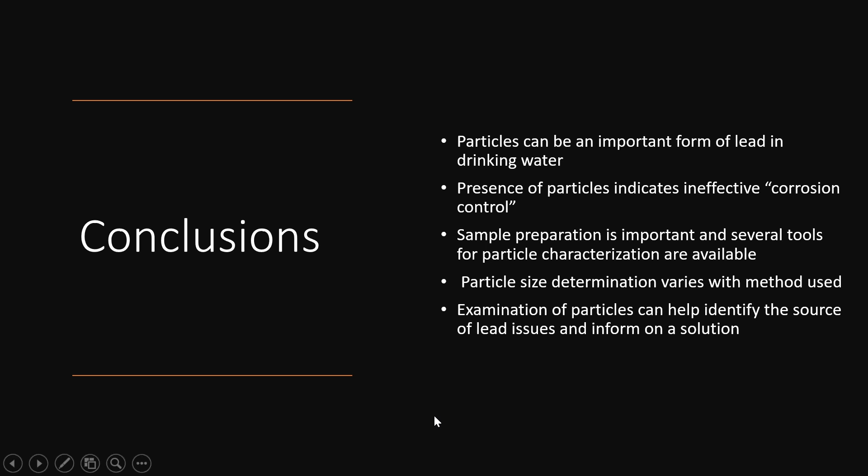Yeah, great. Thank you, Darren. An important and evolving part of lead corrosion. All right, at this point, we're going to move to questions and answers.